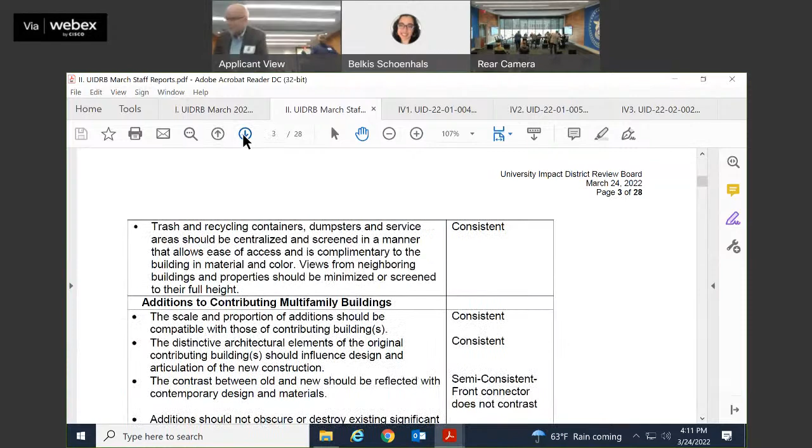March 6th. Go ahead. Yeah, so this is 1782 North High Street, which is a contributing commercial building built in 1909.

The applicant is seeking approval to modify the exterior of the building to accommodate a new Walgreens pharmacy. Exterior modifications include patch and repair of masonry, new paint where needed to match existing, a new metal enclosure, stairs and door on the east elevation, new exterior lighting, window security film on one ground floor storefront window, and new roof mechanicals.

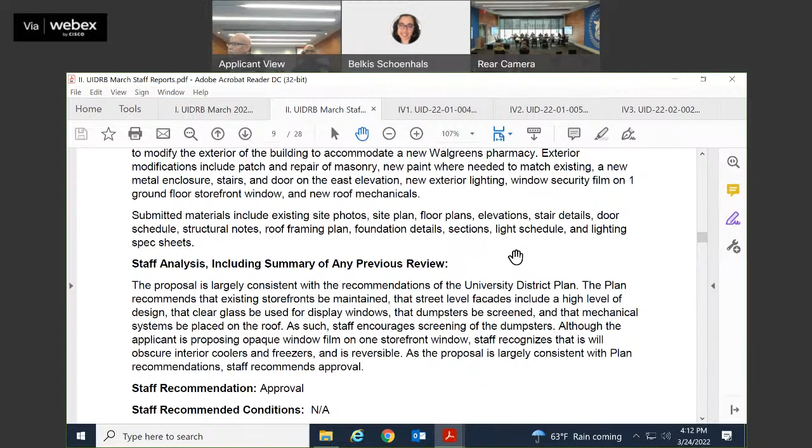Submitted materials include existing site photos, site plan, floor plans, elevation, stair details, door schedule, structural notes, roof framing plan, foundation details, sections, light schedule, and lighting spec sheets. I'll just quickly go to the application.

So this came before the board last month. And the primary concern with this one were the elevations, which had the window film screening. So I can scroll to those, as that's been the primary change.

We still have all the same drawings as were presented last month, but as you can see noted in red, this is the change where they just have the window film on this one window versus before it was on this window, all of these second story front windows, and this side window. So all of that has been taken off and they just have the same setup, just with the one window, with that window film.

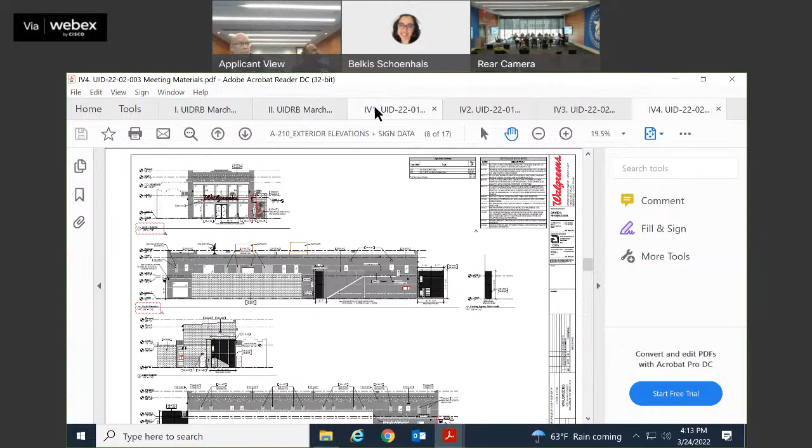And so after review, the proposal is largely consistent with the recommendations of the University District Plan. The plan recommends that existing storefronts be maintained, that street level facades include a high level of design, that clear glass be used for display windows, that dumpsters be screened, and that mechanical systems be placed on the roof.

As such, staff encourages screening of the dumpsters. And although the applicant is proposing opaque window film on one window, staff recognizes that it will obscure interior coolers and freezers and is reversible. So as the proposal is largely consistent with the recommendations, staff does recommend approval.

Thank you. Thank you. Would everyone who wishes to speak, please raise your right hand?

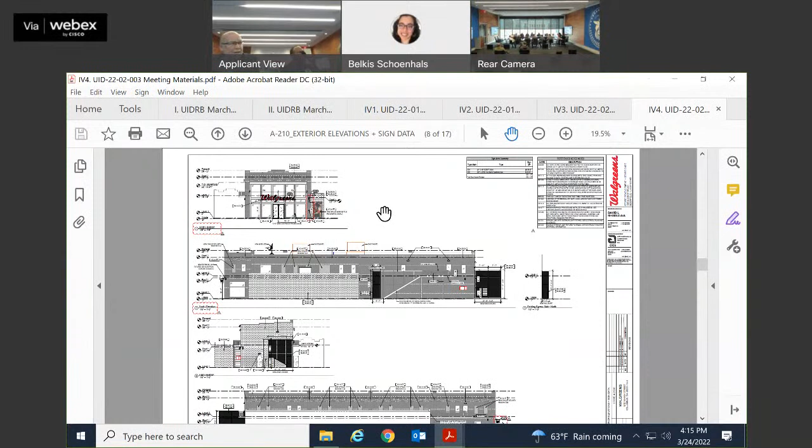No other comments? Can you roll down to the other lower elevation? This one, yeah, that's the Starbucks side. Okay, we don't have it from the other side. I believe this is the Starbucks side, that's here. And then the other lower elevation is here, so this is the street. Oh okay, yeah, so this was removed.

This is going to be clear now - this window would still be clear, so people walking up High Street would still see into the store. It's just the window on that little brick portion right there - that would be covered, which is where the freezers and cooler units would be. We decided that was really the least visible window of anything on that facade. That's kind of tucked back in the corner, it sits back pretty far.

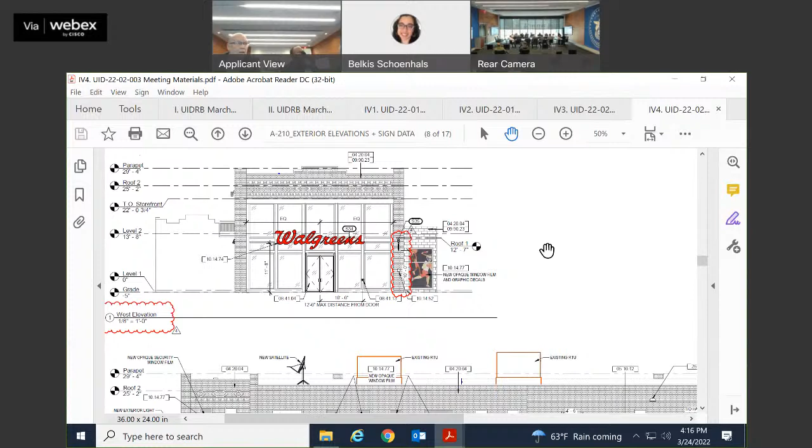We're trying to figure this out - so it's the west facing window in the room labeled passage 2, set down about 10 feet. There's some access into the back of the freezer, and the cooler is actually 10 feet back of the window. Right, but that's still kind of a storage area where there's some shelving, it's not a customer area.

So what's the film you're proposing - is it opaque, transparent, or translucent? It's a mural. We are sticking with a mural like we had presented last time, so I don't actually know if some light will come through it or not. I would say it's probably opaque, because it's just a mess back there - it's the back room area.

Well, you're printing something on it, it's going to say something. But what's the graphic? It's a mural, it's a mural that would have to get approved. Can you see it?

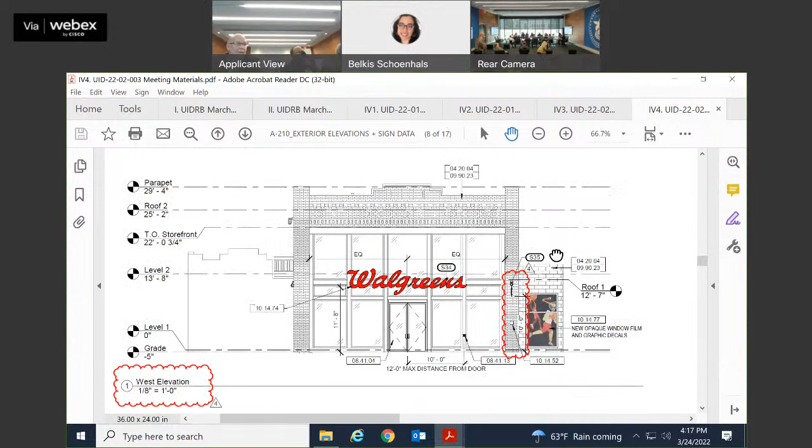Can we ask that you make it translucent? Well then you'd still be able to see the mess of the back room with the lights on behind it. No, that's not what translucent means - it just means you will see light through it, like it were a sign in a way. You will not see anything beyond illumination. If you think of a standard window film, they're often used to maintain privacy in offices - it's sort of milky white, you can't see through it, but it still lets light through.

I think basically we're trying to meet you halfway. We get that there's no good reason to see in there, and we're trying to maintain a certain amount of transparency, because the worst thing for a street is just opacity and darkness. It's not unreasonable, I think that we could probably accommodate that. And it's actually going to give you more presence, honestly, than if it were non-lit.

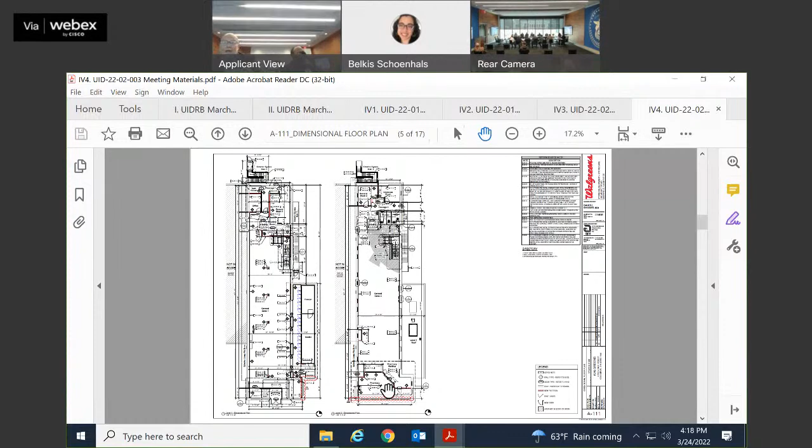Can you talk to us about your pharmacy and how you will control the west light? I know we complained last time that you were covering it up, and now I'm asking how you're going to deal with the sun. That's going to be a problem because we've tried to rework the pharmacy in the upper level of that store. The stairs are at the rear, so is the elevator, and for security purposes we like the pharmacy to look out on the whole length of the store. So the west side facing the sun is actually where the pharmacy would be.

Currently, and from what I understand, last time we had proposed some kind of window covering, but I think we could probably tint the glass. Would that work? I think if you had roller shades - we were talking roller shades, like these kind? Yeah, exactly. Last time you were putting an opaque film, correct?

And we've removed that and we've removed the wall that was immediately behind the window, so you will now see into the working guts of the pharmacy.

But to control the light, is that maybe an issue for the meds? Yeah, we're talking some sort of shade, more opaque than I would hope for, but they make all percentages of that. And we are facing due west, so that's going to be an issue, but that would probably be a good solution with roller shades.

Talk to us about your signage. That sign? That's on the next application, so we should have another one. Okay, so never mind, but we can jump right to that one when we're done voting on this one.

So how about we make a motion to approve the application with the following condition: that the west-facing recessed ground floor window graphic be translucent to allow light to be transmitted, but no view into the store. And that the second-story windows into the pharmacy be unobstructed with anything other than solar roll shades that will allow transparency in the evening, such that we will be able to see the pharmacy when it's dark out. And of course, all the shades have to be lowered at the same height.

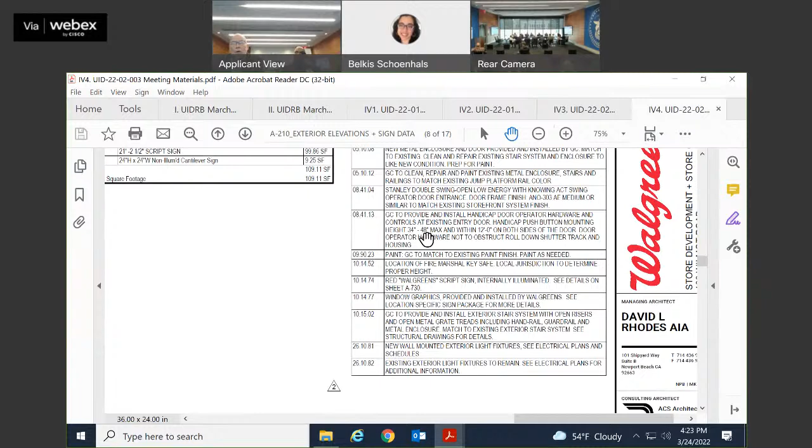It will not be painted red. We don't want to. I forget what our note on our drawing says, honestly. Glad you brought it up, Pasquale. We were so worried about the windows, we weren't thinking about that. So what, we have to answer that. We need to know what the answer is. I want to see what the note on our drawings said. It said we would touch up and repaint, retouch the paint and/or point. Paint to match, and I just don't know how you paint to match the rusty metal.

Okay, then I need to amend my motion. What do we want there, guys? You want it to stay the same? Sure, that's fine. I just wanted to know. Right now, do we have a sense of what it is? It's not Corten, is it? No, it's not Corten, it's some sort of distressed finish. It appears to be steel. Yeah, it is steel, it's structural steel, but it had something on it, it has patina.

All right, if we could amend it to add that the exposed structural steel on the facade finish will remain as is, other than maintenance.

Can I get a second to that amendment? Second. Sorry, who was that? Keone was the second. I'll call the roll then.

Mr. Fleming, yes. Mr. Grado, yes. Mr. Petrozelio, yes. Mr. Reeves, yes. Mr. Samansky, yes. Ms. Sauer, yes. Thank you. Okay, should we jump to the sign application?

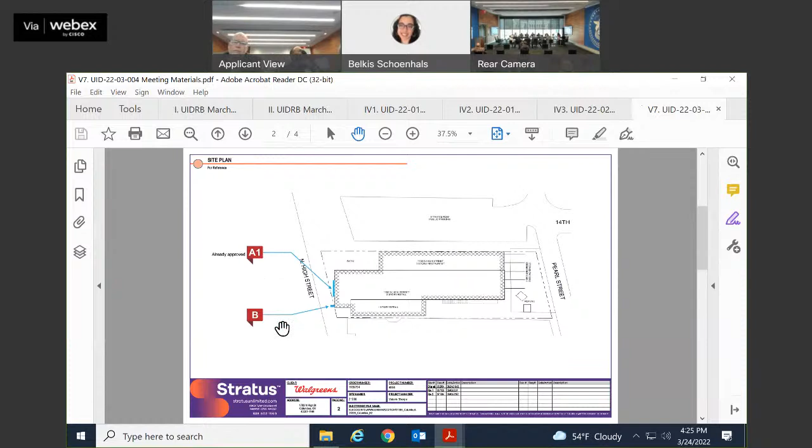This is the location of the sign. I wanted to note that sign A1 has already been approved and the CO has been issued for that, so we're focusing on sign B. This is the location, sign B here on the elevation, and you can see it there hanging in the rendering. This is the material details of the sign, so you can see the thickness, the size, and how it will look.

Based on that, the proposal is consistent with the recommendations in the University District Plan. The plan recommends projecting, pedestrian-oriented signs in the university area that are proportional to the building, located above the storefront display windows or transoms and below the second-story window sills. As the proposal is consistent with plan recommendations, staff does recommend approval.

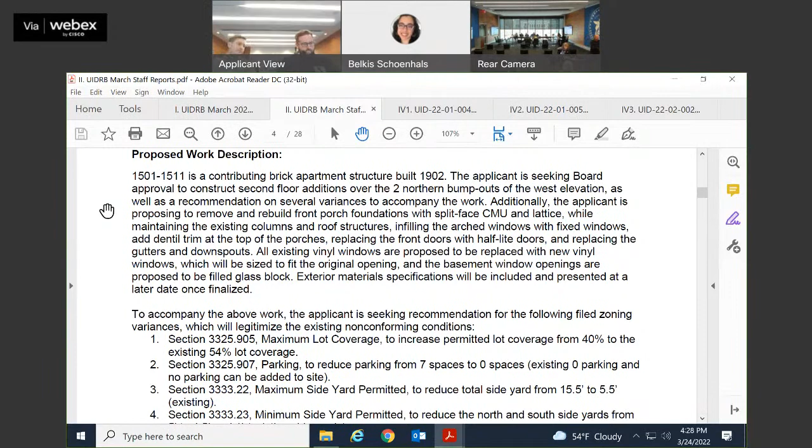1501 to 1511 — sorry, wait, I'm on the second. There we go. All right, so this is 1445 Neil Avenue, a contributing apartment structure which was originally two single-family homes built in 1908.

The applicant is seeking conceptual feedback to construct an addition to the existing building on the west elevation, as well as a recommendation on variances to accompany the work. The project will increase the number of dwelling units from 10 to 13, increase FAR to 0.91, reconfigure the parking area, and remove and rebuild the Neil Avenue entry.

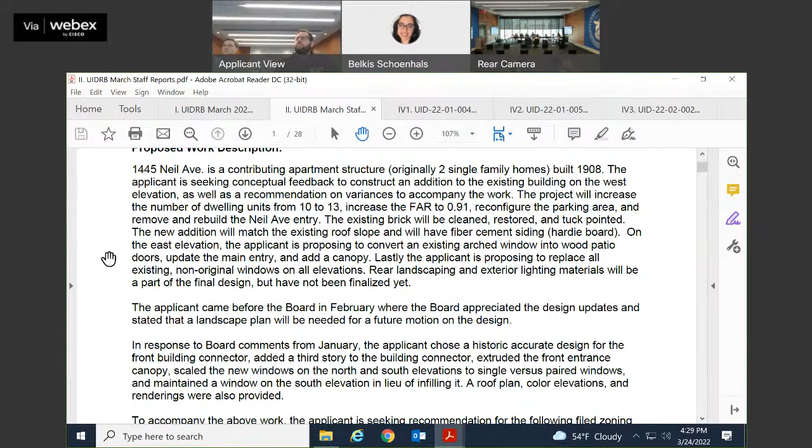The existing brick will be cleaned, restored, and tuck pointed. The new addition will match the existing roof slope and will have fiber cement siding, hardie board. On the east elevation, the applicant proposes converting an existing arched window into wood patio doors, updating the main entry, and adding a canopy. Lastly, the applicant proposes replacing all existing non-original windows on all elevations. Rear landscaping and exterior lighting materials will be part of the final design but have not been finalized yet.

The applicant came before the board in February, where the board appreciated the design updates and stated that a landscape plan will be needed for a future motion on the design. In response to board comments from January, when they originally came, the applicant chose a historically accurate design for the front building connector, added a third story to the building connector, extruded the front entrance canopy, scaled the new windows on the north and south elevations to single versus paired windows, and maintained a window on the south elevation in lieu of infilling it. A roof plan, color elevations, and renderings were also provided.

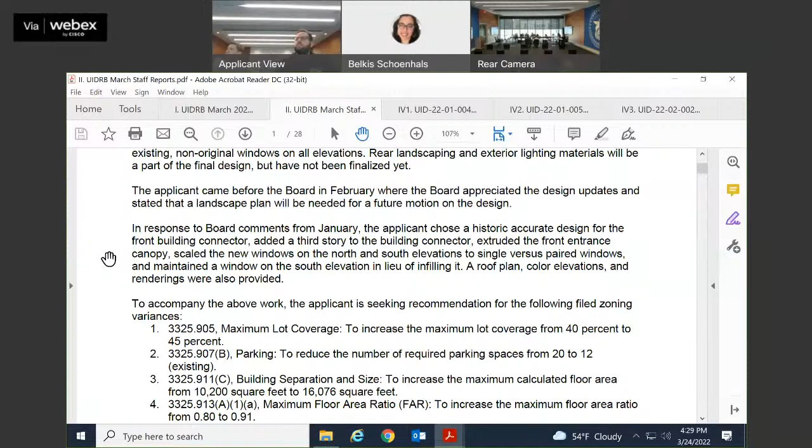For this work, the applicant is seeking recommendations for the following filed zoning variances: to increase lot coverage from 40% to 45%; to reduce the number of required parking spaces from 20 to 12; to increase the maximum calculated floor area from 10,200 square feet to 16,076 square feet; to increase the maximum FAR from 0.8 to 0.91; to reduce the total side yards from 16 feet to 11; and to reduce the minimum north side yard from 5 feet to 1 foot.

Oh sorry, there's two more. Not to provide two interior parking lot trees within and internal to the 12 space parking lot, and then to permit the existing driveway from Neil Avenue.

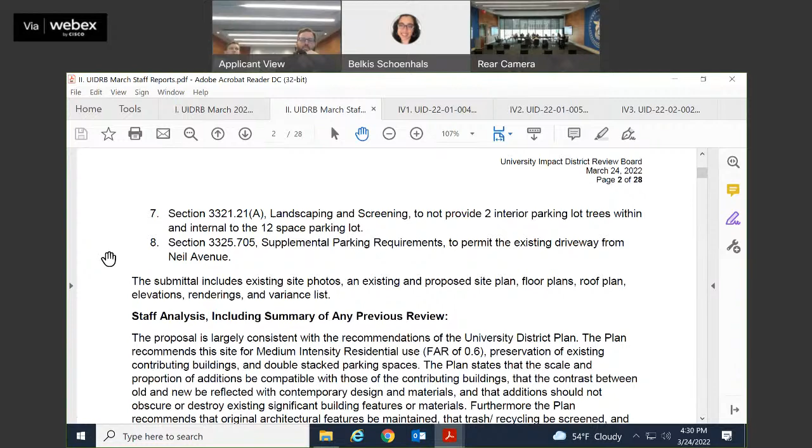Their submittal includes existing site photos, existing and proposed site plan, floor plans, roof plans, elevations, renderings, and a variance list. A lot of this is the same from last time, but I'll end on the elevations.

So that's the front elevation, that's the north elevation which is the side, the rear elevation, and then the other side. After review, the proposal is largely consistent with the recommendations of the plan.

The plan recommends a site for medium intensity residential use, which is an FAR of 0.6, preservation of existing contributing buildings, and double stacked parking spaces.

The plan states that the scale and proportion of additions be compatible with those of the contributing buildings, that the contrast between old and new be reflected with contemporary design and materials, and that additions should not obscure or destroy existing significant building features or materials.

Furthermore, the plan recommends that original architectural features be maintained, that trash recycling be screened, and that bicycle parking be provided. As the proposal generally preserves and/or enhances the contributing building and is compatible with its existing scale, staff is generally supportive.

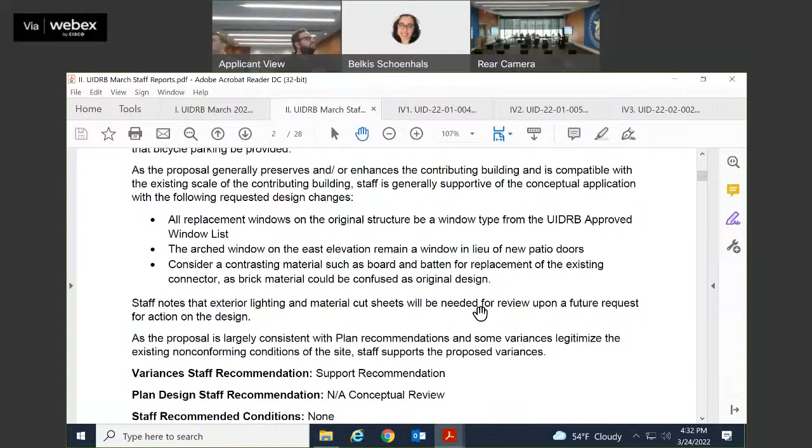We do request the following design changes: that all replacement windows on the original structure be a window type from the UIDRB approved window list, that the arch window on the east elevation remain a window in lieu of new patio doors, and then to consider a contrasting material such as board and batten for replacement of the existing connector, as brick material could be confused for original design.

Staff notes that exterior lighting and material cut sheets will be needed for review upon a future request for action on the design. But as the proposal is largely consistent with plan recommendations and some variances legitimize the existing non-conforming conditions of the site, staff does support the proposed variances.

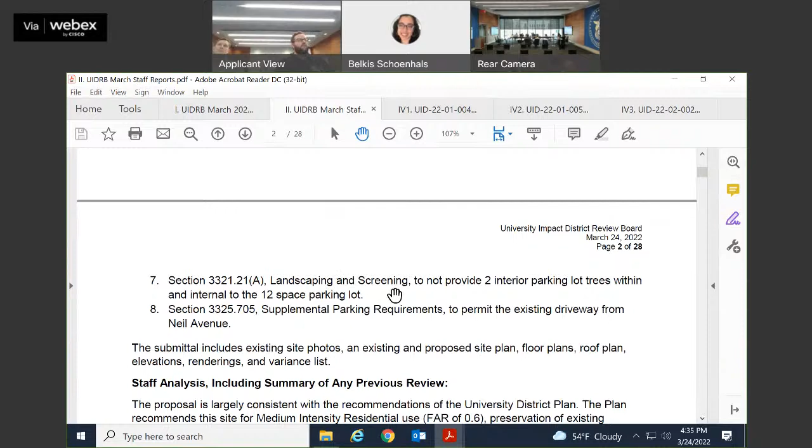We do have trees, but the variances - the parking lot requirements in the zoning code say the trees need to be internal to the lot. So we understand. What we're saying is we support you, we'll support you on the variance, but we want to see the trees elsewhere on the property. Right, so looking at your site plan, seems like you got room adjacent to the parking lot for trees.

Belkis, can you be clear about the density variances? They're showing a need for variances, but you're saying the plan supports a higher FAR, 0.6, 0.6. And existing is what, 0.4 or something? Let's see - they're increasing the FAR from 0.8 to 0.91.

So the way this exists already, it's over the recommended FAR of 0.6, and then they just want to increase that further by 0.11. So it's not a significant increase from what is currently built there right now. And you need to have it in order to make it all work? Yes, okay.

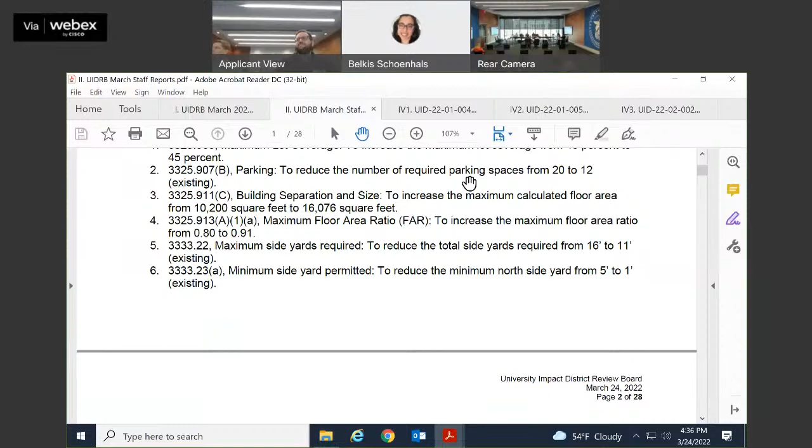And a lot of the variances are because the site is non-conforming as it's built right now, so a lot of the variances are to legitimize the non-conformance of this, to conform the site essentially. The 12 parking spaces that we're proposing match the number of parking spaces that currently exist on the site.

I think Frank and I are okay with it, and you are with trees, Ryan - anything? Okay, all right.

How does adding all of that building only add 0.1 to the FAR? Doesn't that seem - well, you're demoing, aren't you? Yeah, that's fair. There's some chunks on the back that they're getting covered. Now, isn't that new - the whole new... it does seem to be. It may have to do with the fact that there's more square footage when you go vertically on the original than there is with what they're adding.

So you did all the calculations and we can believe you, correct? Well, so I think just for clarity, we're allowed a 0.8 FAR. We're proposing 0.91. Right, because you're conserving the building, you get a bonus. I have no idea what the existing FAR is. Okay, so it's not how you characterized it.

Right, it's not. Well, that makes more sense. That's a good catch. Believe me. So 0.8 is allowed, okay, so we're only 0.1 above, not 0.3, so that makes sense. Okay, makes sense.

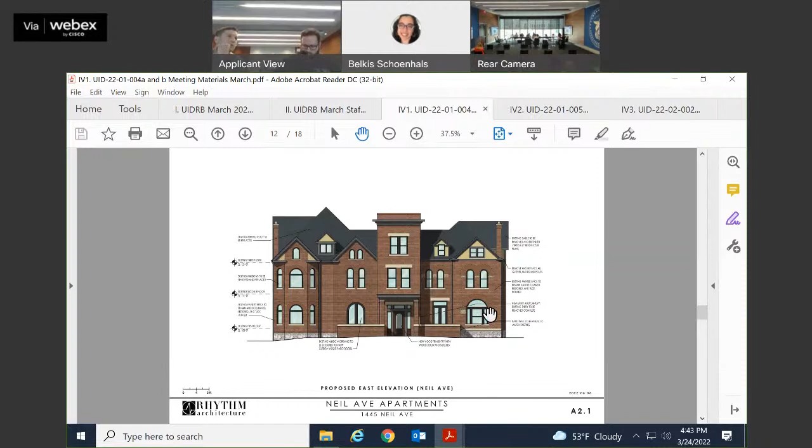Which one, all the way to the right? The right side, the first one. See, now you have weight, you'll notice on your patio doors, you have weight around the edges. And when you put a horizontal bar in there and leave the weight, it'll look fine. But on the right, it looks a little flimsy to me. So I don't know if that's an existing situation or a new window.

We're replacing all the windows, but that one's set in pretty elaborate trim. By replacing the windows, you just remove the glass, you're gonna keep the columns and the header. Okay, yeah, see, there's a lot more there. There's frame and then there's sash. Here, you're just showing frame. So we want to see frame and sash.

What was the other staff comment, Belkis? I think you had three. Window, let's go back. Oh, and see we're off the approved list. Or yeah, the windows you bring us to approve.

I mean, on the comment side, I remember this one, I guess two months ago, Brad, and I think it's clean, it works. The comments that were made the first time around about the differentiation between front and back, it all makes sense. I'm pretty good. So I think, do your drawings, come back with the stuff you need to do, and I think you're in good shape. Sounds good.

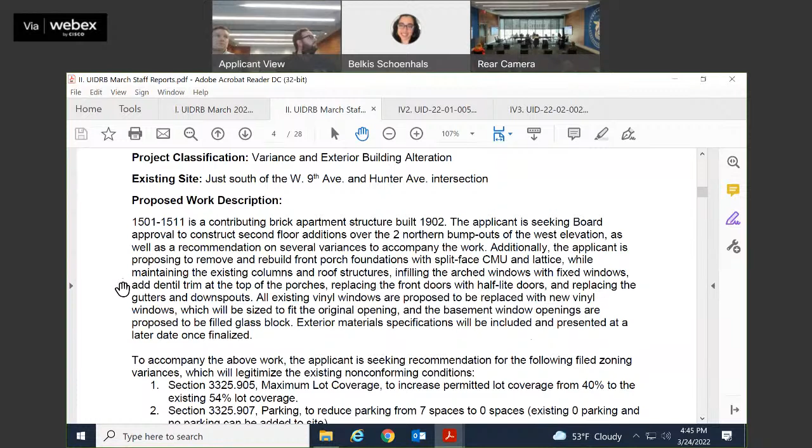The entire address, which is 1501 to 1511 Hunter Avenue, is a contributing brick apartment structure built in 1902. The applicant is seeking board approval to construct second floor additions over the two northern bump outs of the west elevation, as well as a recommendation on several variances to accompany the work.

Additionally, the applicant is proposing to remove and rebuild front porch foundations with split face CMU and lattice, while maintaining the existing columns and roof structures, infilling the arch windows with fixed windows, adding dentil trim at the top of the porches, replacing the front doors with half-light doors, and replacing the gutters and downspouts.

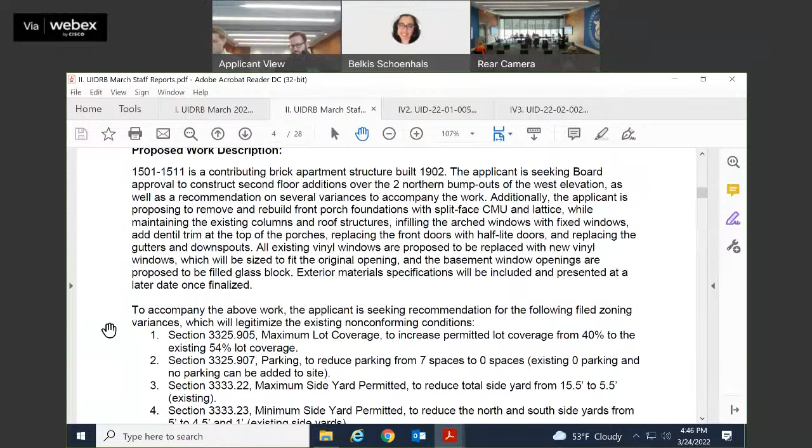All existing vinyl windows are proposed to be replaced with new vinyl windows, sized to fit the original opening. The basement window openings are proposed to be filled with glass block. Exterior material specifications will be included and presented at a later date when finalized, which actually is today.

To accompany the work, we have some variances: to increase the permitted lot coverage from 40% to 54%, to reduce the parking from 7 spaces to 0, to reduce the total side yard from 15.5 feet to 5.5 feet, to reduce the north and south side yards from 5 feet to 4.5 feet and 1 foot, and to reduce the total required minimum rear yard from 25% to 21%.

And again, a lot of these are to conform. Yeah, so Belkis, it appears that these are to bring it into conformance with the existing conditions.

Exactly. The applicant last came to the board last month, whereby the board recommended that the porch post piers be simplified and to use split face block for the front porch foundation. The board also recommended single pane or possibly double hung windows for the 3rd story dormers.

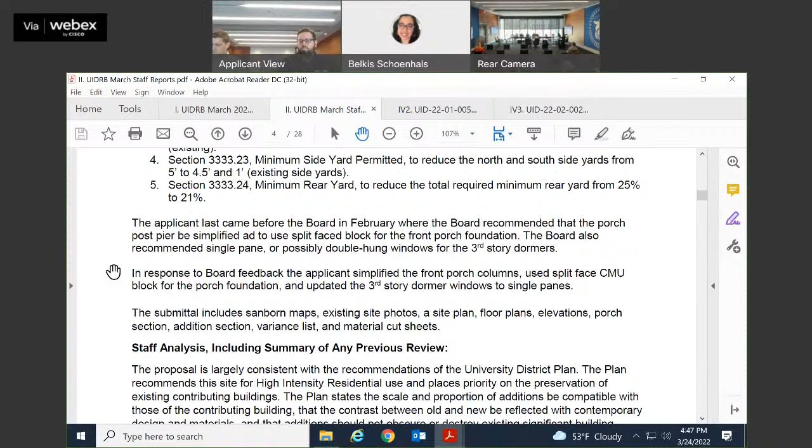In response to the board feedback, the applicant simplified the front porch columns, used split face CMU block for the porch foundation, and updated the 3rd story dormer windows to single panes.

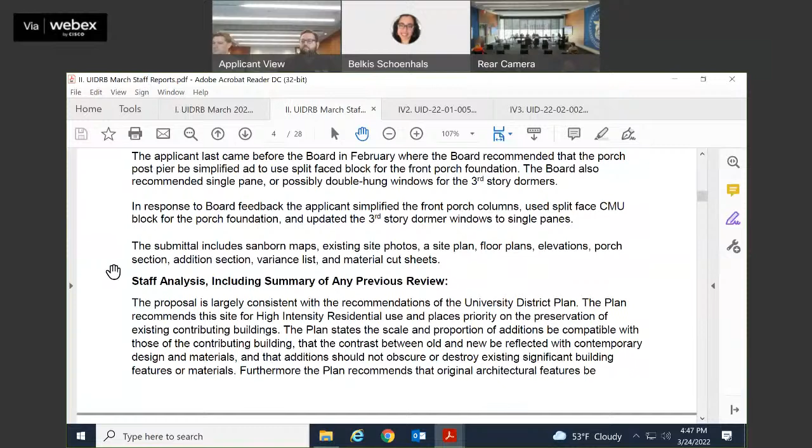The submittal includes Sanborn maps, existing site photos, a site plan, floor plans, elevations, porch section, addition section, variance list, and material cut sheets.

Again, most of us have seen these drawings, but going to the elevations, here you can see the difference in the windows up here in the dormers. The porch columns are fairly simple in design, and then really on this other side.

This is where we were talking about that split face CMU and how it met the grade. So they updated that and the materiality of that.

Based on this review, the proposal is largely consistent with the recommendations of the University District Plan. The plan recommends the site for high-intensity residential use and places priority on the preservation of existing contributing buildings. It states that the scale and proportion of additions be compatible with those of the contributing building, that the contrast between old and new be reflective of contemporary design and materials, and that additions should not obscure or destroy existing significant building features or materials.

Furthermore, the plan recommends that original architectural features be maintained, that windows and doors no longer used should be maintained and left in place, and that replacement doors and windows should fit the entire opening with no filler or additional framing. As the variances legitimize the existing non-conforming conditions of the site, staff recommends support of the proposed variance recommendation. As the proposal preserves the contributing building and the addition is in scale with the existing building, staff recommends approval for the design.

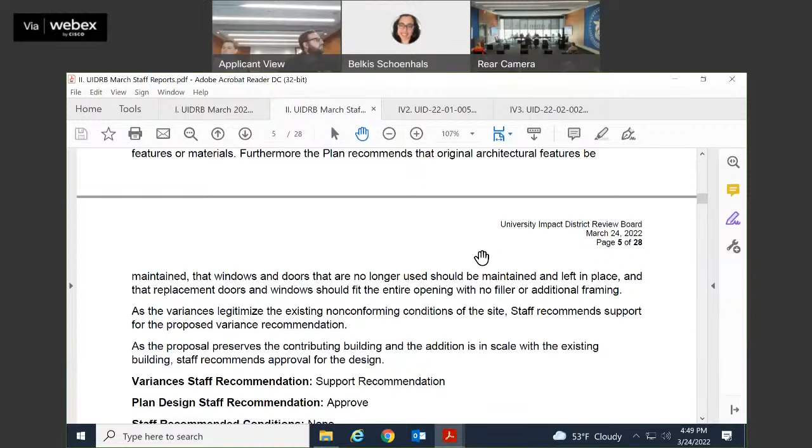Thank you. Thank you.

And are you here seeking approval today? Yes. Okay, and it looks like you've got the drawings. So it's two votes, variance and design, so it'll be two motions, one for the variances and then the second one will be for the design. Should we get the variances in total? I think we should.

I move to support the variances as stated. Second. Mr. Fleming? Yes. Mr. Petrozelio? Yes. Mr. Reeves? Yes. And Mr. Semansky? Yes. Thank you.

Tell us about the changes, Bradley, please. Sure. On the Hunter Avenue side, KV had a really good point about how the previous porch design didn't really meet the ground very well in all conditions.

So I went through and simplified the foundation to just be split face. I have bump outs below the columns that turn the corners and meet the grade at the alley side much better. And the windows on the faux dormers at the top were double hung last time and kind of squat, so we removed the center mullion and made them a single pane, fixed.

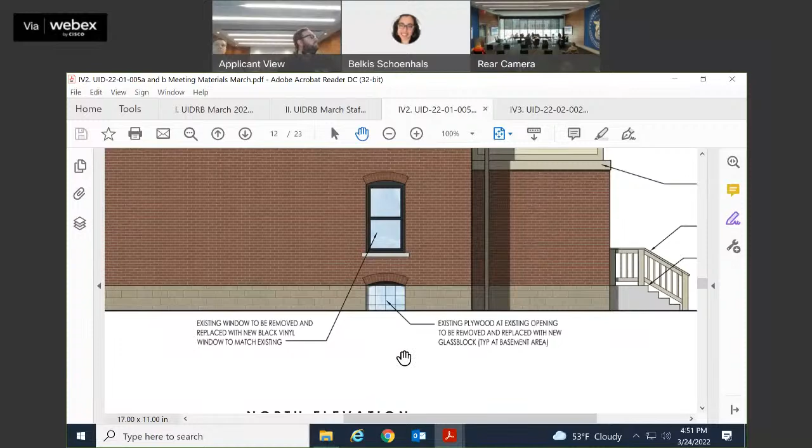We don't think we have to finish. I mean, it's fine.

Hey Ryan, make a motion. Submitted. Do I have a second? Seconded. Sorry, who was that? Kelly seconded. Okay, all right. Mr. Fleming, yes. Mr. Petrozelio, yes. Mr. Reeves, yes. Mr. Semansky. Okay, thank you, thanks guys.

Is that it? Are we done? Sorry, oh my God, can't get around this yet. Get you out the door.

One is on Summit, that's right. Okay, so 1520 Summit Street is a contributing brick, single-family home built in 1900. The applicant is seeking approval for exterior building updates and to construct a 3-story rear addition to convert the structure from a single-unit home into a duplex. The plans include new siding, roof, wood front door, aluminum-clad windows on the existing structure, which would replace vinyl windows and siding.

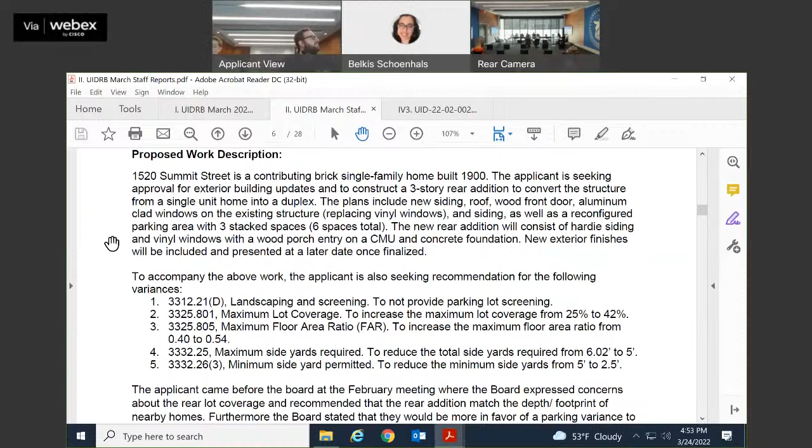As well as a reconfigured parking area with 3 stacked spaces for 6 spaces total. The new rear addition will consist of hardie siding and vinyl windows with a wood porch entry on a CMU and concrete foundation. New exterior finishes will be included and presented at a later date once finalized. So to accompany the above work, the applicant is also seeking a recommendation for the following variances, so we would need a motion and vote on this.

To not provide parking lot screening, to increase the maximum lot coverage from 25 to 42%, to increase the maximum FAR from 0.4 to 0.54, to reduce the total side yards from 6.02 feet to 5 feet, and to reduce the minimum side yards from 5 feet to 2.5 feet.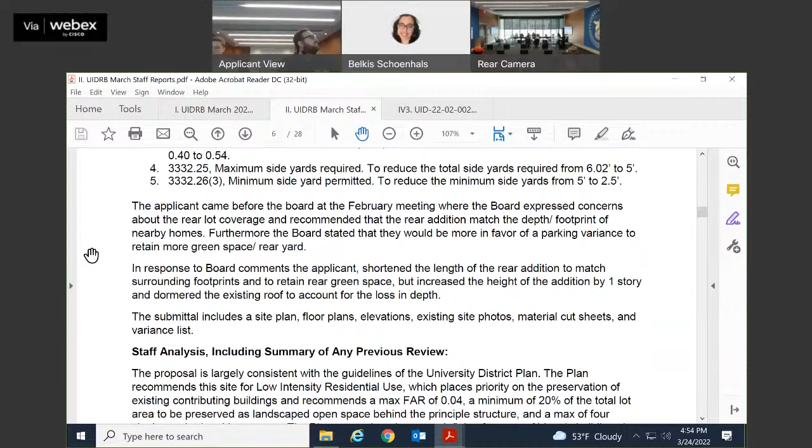The applicant came before the board at the February meeting where the board expressed concerns about the rear lot coverage and recommended that the rear addition match the depth and footprint of nearby homes. Furthermore, the board stated that they would be more in favor of a parking variance to retain more green space or rear yard. So in response to board comments, the applicant shortened the length of the rear addition to match surrounding footprints and to retain rear green space, but increased the height of the addition by 1 story and dormered the existing roof to account for the loss in depth.

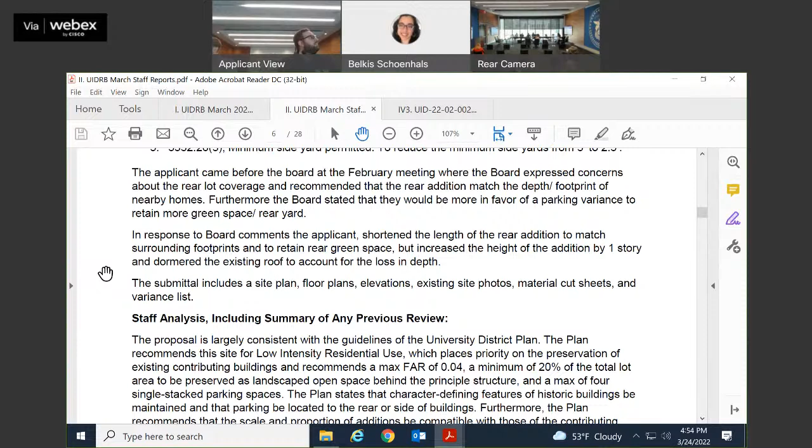So the submittal includes a site plan, floor plans, elevations, existing site photos, material cut sheets, and a variance list. To go through this one, this is the proposed site plan. This is the backyard. You see the parking here, rear yard, and then in this gray color is the addition. So this is shorter than what it used to be. And then we have the first floor plan, second floor plan, and then proposed attic plan.

So you can kind of see how they dormered out the sides there. This is the west elevation, facing front, so you can see those little dormers up there. The proposed south elevation, so you can see how the rear is shorter than what it once was. Proposed east elevation, so this is the rear, and then the proposed north elevation. Here we have a wall section, building section, another wall section here, and then this is what it looks like today, so that's the back, sides, and then this variance list.

And if you need, I can bring up the one from last month, I know it can be tricky to remember. But after review, the proposal is largely consistent with the guidelines of the University District Plan. The plan recommends this site for low intensity residential use, which places priority on the preservation of existing contributing buildings, and recommends a max FAR of 0.04, a minimum of 20% of the total lot area to be preserved as landscaped open space behind the principal structure, and a max of 4 single stack parking spaces. The plan states that character defining features of historic buildings be maintained and that parking be located to the rear or side of buildings.

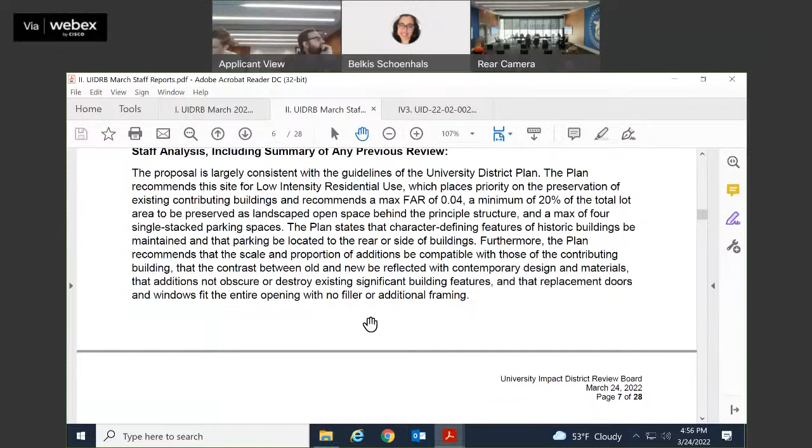Furthermore, the plan recommends that the scale and proportion of additions be compatible with those of the contributing building, that the contrast between old and new be reflected with contemporary design and materials, that additions not obscure or destroy existing significant building features, and that replacement doors and windows fit the entire opening with no filler or additional framing.

So as the proposal preserves a contributing building and the addition is in scale with the existing building, staff is generally supportive of the variance recommendation, but requests that 4 parking spaces be provided in lieu of 6 to ensure consistency with the plan. A recommended layout is to have 3 single stack spaces across with 1 double stack space to maximize the usable green space.

Staff is generally supportive of the conceptual design and requests the following design update: that all replacement windows be of the window type from the approved window list, for the contributing part of the structure. Overall, we support recommendation for the variances.

Thank you. Additional comments? As far as the variances are concerned, no further issues. Any comment among board members regarding the variances?

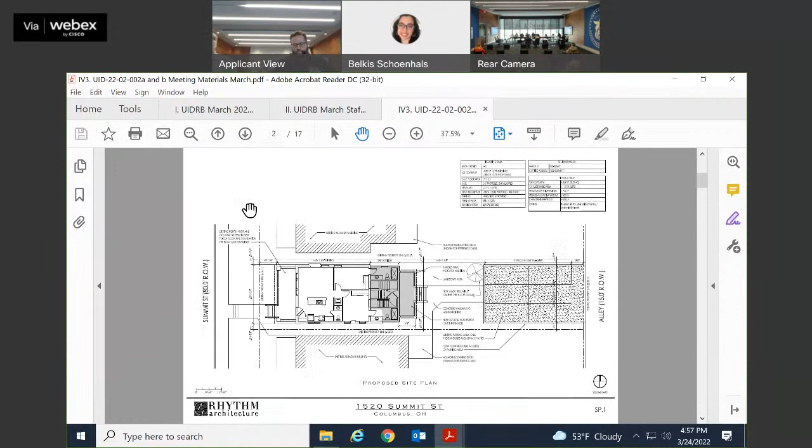Because you've essentially made it no deeper than your neighbor. Correct. But what about the bulk, though? I mean, those are enormous. To call them dormers is a bit of a semantic issue here.

Can we see the streetscape? Can we see the setback? Take me to the wrong house. Oh no, it's the other way. Yeah, Google Maps takes you to the wrong house. This one, it's the third house.

The adjacent buildings have pretty similar sized dormers that actually face Summit. Ours would be set back quite a ways. Those are smaller, but on the same side of the street there. Which one's the building? That one, that one. I would zoom out at 10.

Let's go down the street, please. Oh yeah, left or right? No, sideways, if you can. So letting me go over to the side. There you go, right there, stop, please.

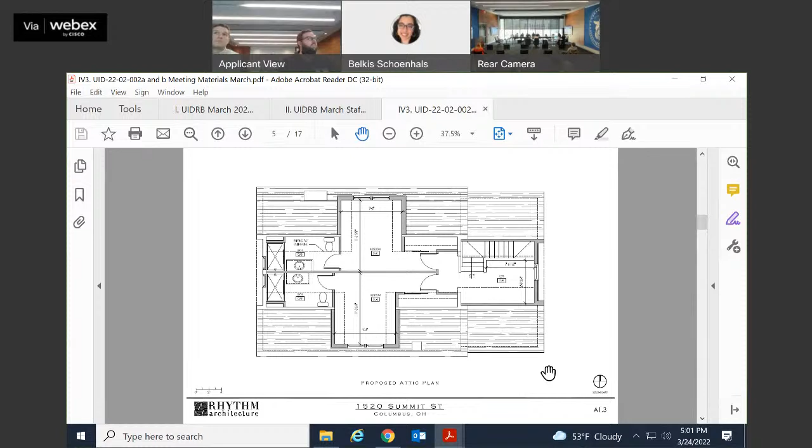I think the thing we're struggling with is if you look at the image of the street, the dormers on the adjacent buildings are fundamentally subservient to the primary roof line. It reads, they're a little different, they're hips, but they read as hips with dormers. What you're doing is, you're calling it a dormer, but you've basically now got like a cruciform gable rather than a dormer. So I think what Frank's at, which seems a reasonable compromise, is if you can drop the ridge of the dormer a little bit, the dormer is subservient to the gable, so it doesn't break the ridge. Gotcha.

Now, what about changing the pitch? I know that's heresy, but let's look at the side elevation again. Would it be the end of the world? What is that, 8 in 12? Does it match the other pitch? I mean, 9-12, you could put it.

9. What about a shed? You could put a shed dormer in, or you could lower the pitch. I don't think it would matter much. I'd rather have a shed in there anyway. If the shed is reasonable, that's much better. You gotta keep the spring of it off the ridge, go down a foot.

Please go back to the street view. Sorry to keep asking. I think I'd be okay with the shed. It would fall back better, wouldn't it? Yeah. I'm okay with that.

So why'd you propose the gable? You were second guessing us. That's not it. Thank you for saying it, so I didn't have to say that. Well, it's your job to second guess us, so I said that'd be embarrassing.

I think it's reasonable because fundamentally it's a nice house, right? It's a clean two-story gable with a nice clean form. I think what you really want to do is, it's fine to put a dormer on there to give more space and more rent, but you want to keep it secondary to the primary form. I think a shed dormer will do that. It'll get you more ceiling space, and honestly it's going to be cheaper, surely cheaper.

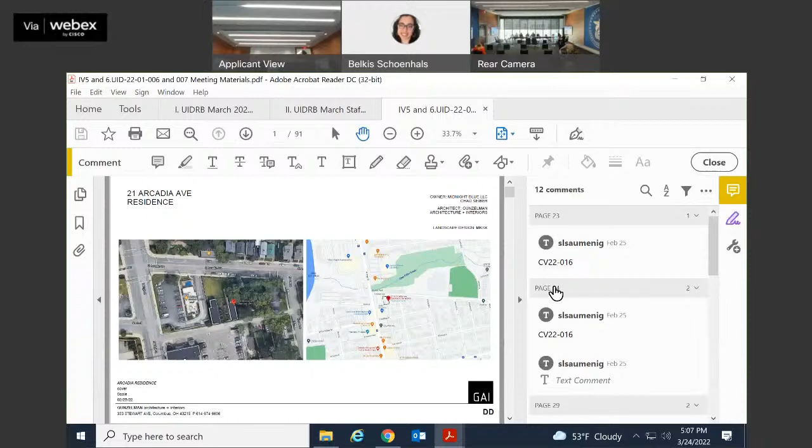$285 in 1965 for 2 Nakashima captain's chairs and 4 of those 3-legged chairs. That sounds about right. I think the tables back in the day went for a few thousand, and maybe they're now worth 60 to... Well, first I thought that's a huge amount, but then I realized that's how much my high school tuition was, the most expensive Catholic school I paid through a year. Catholic school tuition was $15,000 to $20,000, which is about how much those pieces are worth today. Now it's better, it's normal.

So it looks like we're on 21 East Arcadia. It's funny you say that. It was in the 800s. Well, you do it because it was the most. We're back on.

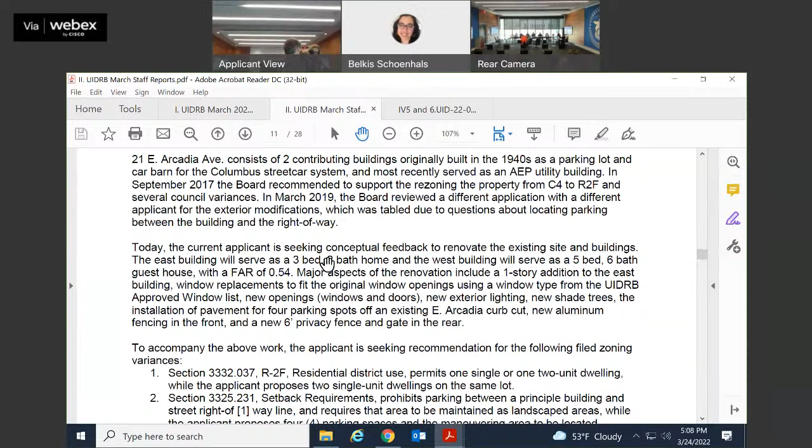21 East Arcadia Avenue consists of 2 contributing buildings, originally built in the 1940s as a parking lot and car barn for the Columbus streetcar system, and most recently served as an AEP utility building. In September 2017, the board recommended support for rezoning the property from C4 to R2F and several council variances. In March 2019, the board reviewed a different application with a different applicant for exterior modifications, which was eventually tabled due to questions about locating parking between the building and the right-of-way. Today, the current applicant, different from before, is seeking conceptual feedback to renovate the existing site and buildings.

The east building will serve as a 3-bed, 2-bath home, and the west building will serve as a 5-bed, 6-bath guest house with an FAR of 0.54.

Major aspects of the renovation include a 1-story addition to the east building, window replacements to fit the original window openings using a window type from the UIDRB approved window list, new openings for windows and doors, new exterior lighting, new shade trees, installation of pavement for 4 parking spots off of an existing East Arcadia curb cut, new aluminum fencing in the front, and a new 6 to 8-foot privacy fence in the rear.

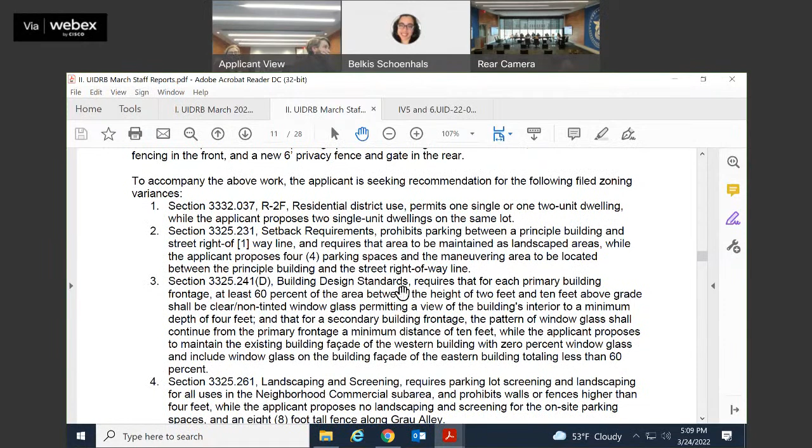To accompany the work, the applicant is seeking recommendations for the following filed zoning variances, which will need a motion today: to have 2 single-unit dwellings on the same lot, to have 4 parking spaces with the maneuvering area located between the principal building and the right-of-way, and to maintain the existing building facade of the western building with 0% window glass, including window glass on the building facade of the eastern building totaling less than 60%.

Additional variances include no landscaping and screening for the on-site parking spaces and an 8-foot tall fence along Grau Alley, 4 parking spaces in the new arrangement to be located between the principal building and the street right-of-way, maintaining a lot area of 10,000 square feet or 5,000 square feet per dwelling unit, and a reduced maximum side yard of 7.6% of the width, or 6 feet.

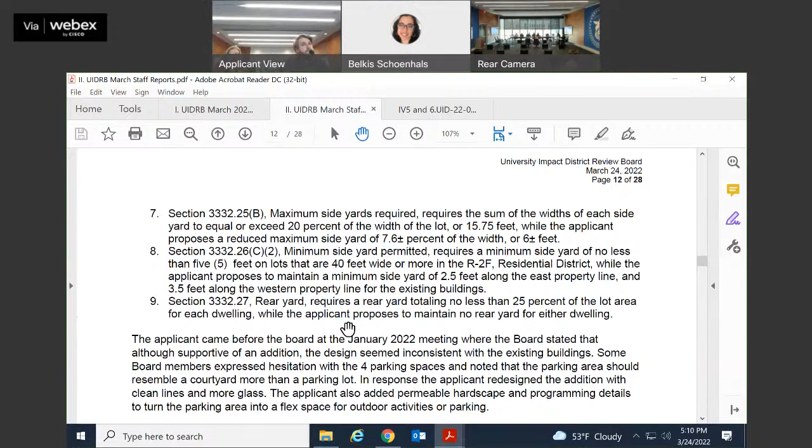Also maintaining a minimum side yard of 2.5 feet along the east property line and 3.5 feet along the western property line for the existing buildings, and maintaining no rear yard for either dwelling.

The applicant came before the board at the January 2022 meeting, where the board stated that although supportive of an addition, the design seemed inconsistent with the existing buildings. Some board members expressed hesitation with the 4 parking spaces and noted that the parking area should resemble a courtyard more than a parking lot.

In response, the applicant redesigned the addition with clean lines and more glass, and added permeable hardscape and programming details to turn the parking area into a flex space for outdoor activities or parking. The submittal includes existing site photos, site plan, elevations, renderings, variance list, and material selection.

Going to their drawings here, we have the site plan. You'll see the permeable pavers where the parking flex area would be, and you can see that the addition has changed to this envelope right here. Then we have existing site photos that we've seen before.

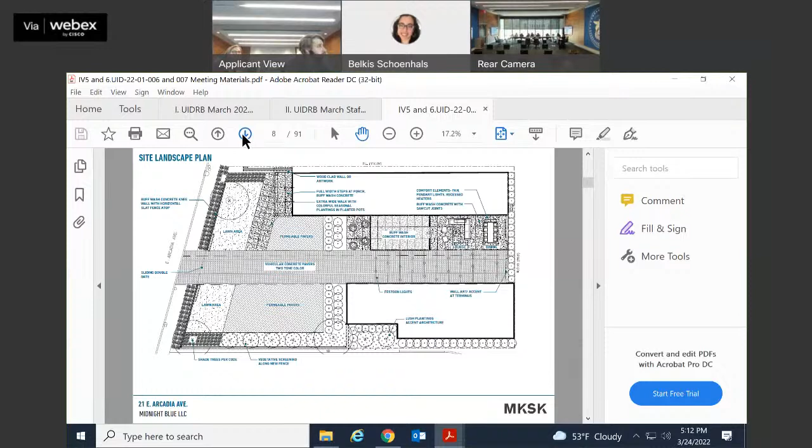Those are interior, so those are new. Here you have the hardscape, or I'm sorry, the landscape plan. You can see that screening has been included to hide the parking area. Here you have the hardscape plan, more landscape plan, design elements and materials, so these seem to be sort of inspiration photos.

And then you have the elevation. This is the new addition here, which is a little bit cleaner, more contemporary in design with more glass. You have the east elevation showing the new addition, the west elevation, and then you have the first floor plan, second floor plan, and the south elevation.

East elevation, this is for the secondary building, west elevation, and then the first floor plan, second floor plan, and here's some rendering. So that's the new addition there.

And then this is the view from the street, so you can see all of the landscaping and the fencing, the flex space. Another shot of that. And then the rest are just variances and all of their material selections. So we can go to those pages, as needed.

But after review, the proposal is largely consistent with the guidelines of the University District Plan. The plan recommends this site for neighborhood mixed use, which places priority on the preservation of existing contributing buildings and recommends multifamily uses, a max FAR of 0.5 and parking at a rate of 0.75 spaces per bed.

The plan states that the character defining features of historic buildings be maintained, that the primary facade of buildings address the street, that landscaping be provided in the front setback, parking be located to the rear or side of buildings, and that parking adjacent to the right-of-way be screened.

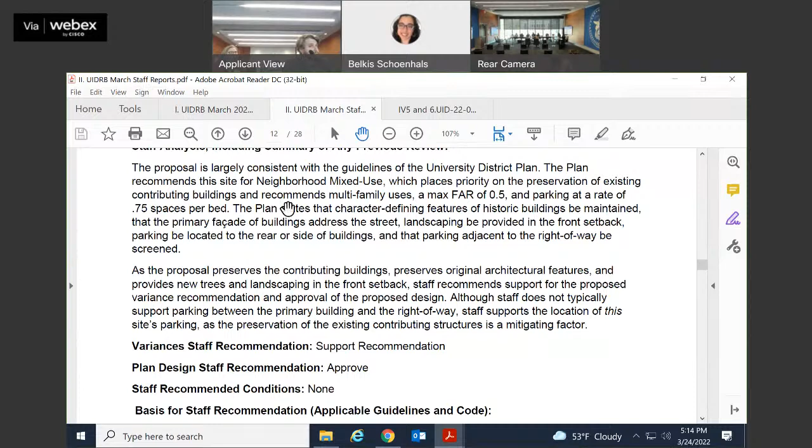My name is Kyle Green. I'm with Gunzelman Architecture and Interiors. I'm Rachel Harkle-Rhoda. I'm with MKSK.

I think it's probably beneficial to walk through some of the design changes in the landscape drawings that we produced. First, I wanted to touch on the variances quickly. The reason why we have 9 variances this time, and last time we talked about one, was by changing that

one variance, which was previously approved at 2 parking spaces in front of the building, and we're requesting 4. We're resubmitting a new site plan, and we basically have to go through all of the previously approved variances as well that were already approved in 2017. So a lot of them, 8 out of the 9 were already approved in 2017.

Just to be clear, now that we came back with a million variances. So yeah, the one variance for the 4 parking spaces in front of the building, I think we'll address that as we go through some of the design changes in the landscape plan.

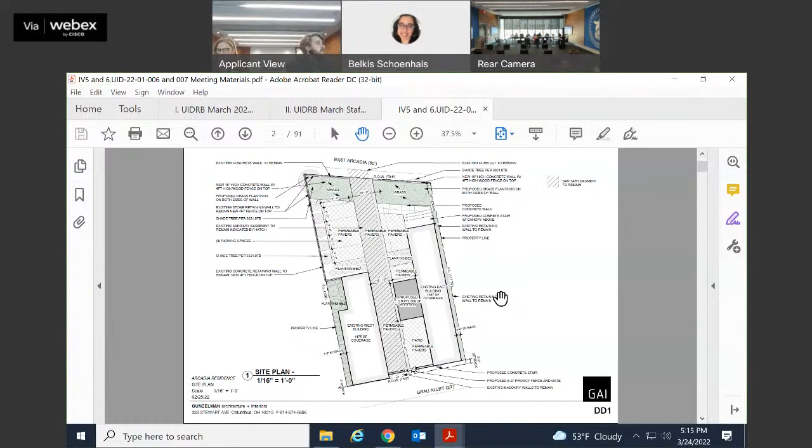Just to talk about the addition, we made a lot of changes to it based on the comments that we received in January from this commission, and we've reduced the footprint a little bit and pushed it back. We've obviously added a lot more floor-to-ceiling windows, and we've removed the entry to the building along this addition that we previously had.

We removed that and put the entry back to the existing entry of the original building. We've also changed the material of the addition, as well as the front canopy, to a black break metal panel. So it's more of an industrial feel.

Previously our old design had sort of a more vertical siding, and we agree with the commission's comments that we were trying to bring more horizontality into the addition. So we've added some cleaner lines and simpler horizontal trim.

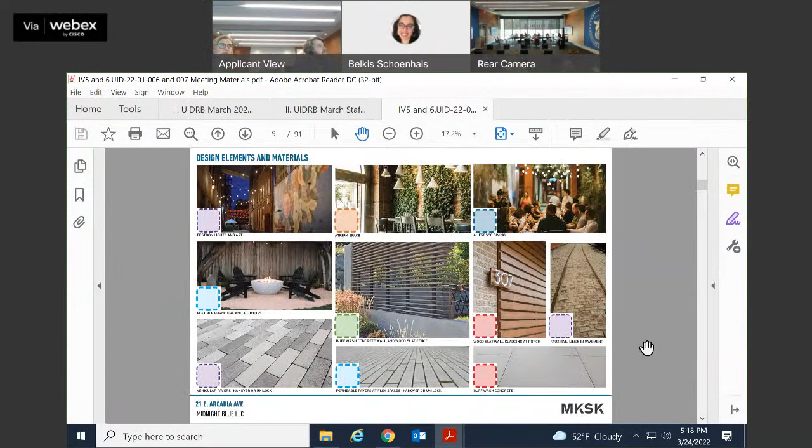I'll let you want to touch on some of the pavement or the pavers. Yeah, sure, screening. So both of the flexible spaces, we're looking at using a concrete paver that's a permeable paver for those areas. And up the alley, we call it the alley down the middle, that's also being proposed as permeable at this time. Two different types of permeable pavers, just for scale differentiation and defining those spaces.

And we do intend the two blue spaces, the blue north of the space, is that north, page north? Yeah, is actually more of a possible turnaround area too, so there's maneuverability within the space.

And then the intention is that the permeable areas are flexible, so they do have entertainment space, and the owner can have entertainment things like a movable fireplace or any of those things, so that everyone can kind of spill out to that space and not have to be restricted to the interior.

The entry walk is a buff wash concrete paving, and then that matches the buff wash at the rear dining lounge, which also spills into the atrium area. So that way we're kind of creating an indoor-outdoor kind of feel within that zone.

Just to the bottom, to the west of the project here is an alley and basically a parking lot, fast food restaurant. So we've provided screening along there as well, really creating zones of flexible use in the space, but when you're in the space, you're kind of screened from some of the alleys and the parking lots as well.

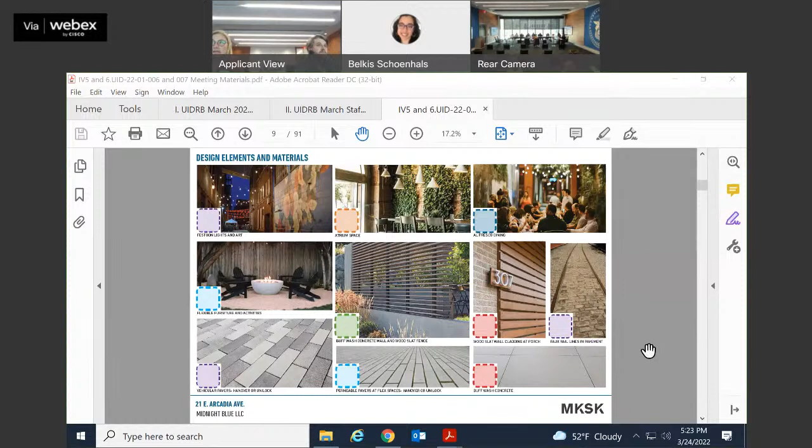Yeah, so this was a parking lot and a car barn. What does that mean, a car barn? So my question is, did they actually pull any cars up in here? It was the trolleys. Yeah, no, the trolley barn was in front of this building, it was in front of train car. This is an older building for the trolley barn, car barn.

I guess if you go back to your plan - the other observation is that once you get beyond the orange thresholds, going south, you have an exterior patio on the north side of the addition. For a party it makes sense, but it's just a lot of paving that doesn't really serve a purpose. I'm not suggesting it become a garden necessarily, but if you were in the addition, unless you put a bazillion pots out there, it became like a hardscape garden almost. This is their deal, so I'm not being critical, just saying that for entertaining it makes a lot of sense - you can have a hell of a party out there.

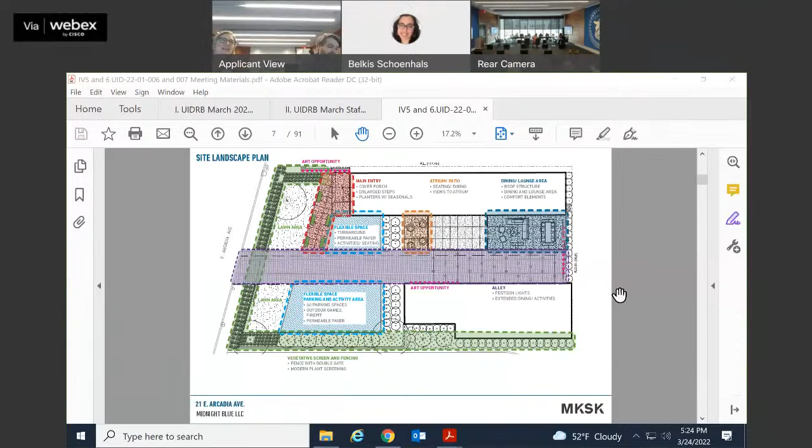We've talked about that area before, because it is a small space. We've discussed greening it up more, maybe making it an art piece in the future, but none of that has been really thought through. I don't know if they get enough sunlight today, but you might do something narrow like a espalier on the brick wall - something that gives it a bit more of a nod to an actual garden. I'm not saying you should do that, just pointing it out.

Other comments, questions? Belkis, could you show us the existing photographs? You tell me which one you like - just do a walk around for all of us.

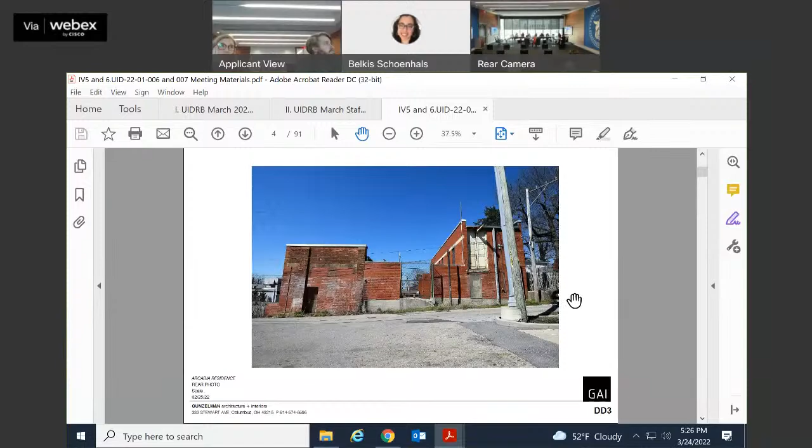So this is the front elevation, what you'd see looking off of Arcadia. This is the back - there's a CVS back here, off of Doddridge, so when you pull into the CVS parking lot, this is what you see. This is an alley that goes between the CVS leading out to High Street, and that alley continues back into a residential neighborhood. These are some interior shots of the building, this is in between the two buildings I think. And these are the old arches where they would pull the cars or trolleys in, along with more interior shots.

Are those glazed brick on the right, the yellow brick? Yeah, I think so, very high fired. I think that came later possibly, and that's sort of what's bricked in.

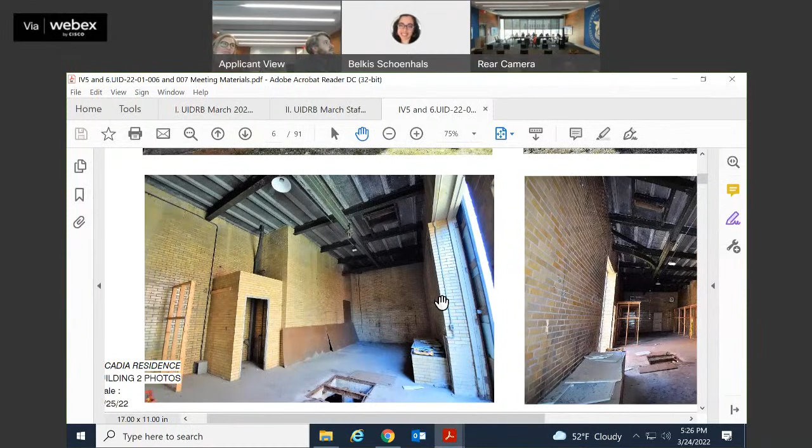Could you show us the relationship between the adjacent houses just east? I'll click on one - see the front street yard view here. So going up Arcadia, there's the house next door, and then there's this fence situation - a large retaining wall, a change in elevation, about 8 foot tall and covered in vine.

Once you show that - is there anything else you want to see, or okay, then can you zoom in on that straight-on front facade on the left? And then can you split screen it with their drawing of that facade?

You're a wonderful person. Hold on. Yeah, I know. Wow, perfect.

No, make it bigger, the one on the left, zoom in, yeah. Make it about the same size as the other one. You want just the- Yeah, you're good, you're good. Okay, you're good.

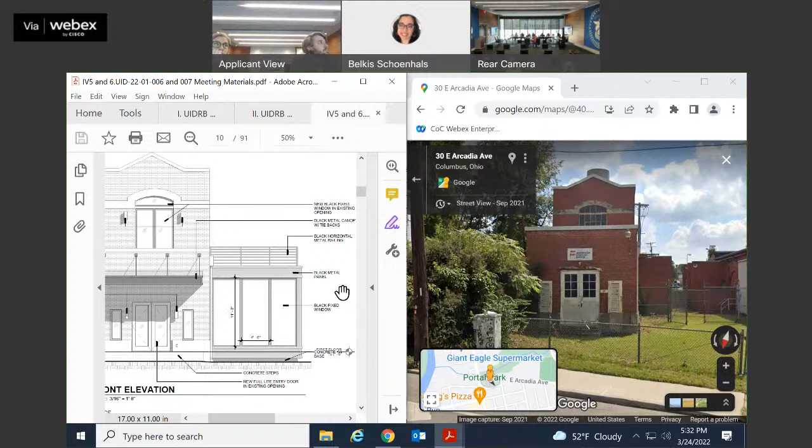And I just wonder if there isn't a better way of doing that. We've looked at like a cable rail that might lend a little delicate touch to the project, or possibly glass panels. I think the loss of the corner is the problem - because it sets back, and it's not... I don't know, it seems like there's an opportunity there to improve that. It's a fairly minor thing, but given that this is the one thing that gets added to the project, I think you're gonna see it.

Yeah, from my standpoint, I think the landscaping is pretty well done. I think you've effectively turned what could have been a pretty shitty parking lot into a more urban experience. I'm not convinced the rails are necessary in any way, but if you want to spend money on it, it's not my business. Which rails?

The rails that go down the alley. Yeah, those, I mean, good set. I can't promise it would happen - budget might not allow in the end.

And I guess one clarification - the drawing elevations show that the other building has storefront filling the existing openings, but the windows appear to be Pella units. Oh, yeah, sorry, we use the same Pella window for both. So yeah, they wouldn't be storefront.

Remind me, what are those again? The Pella windows, Impervia, fiberglass. Oh, fiberglass, what color? Black. Okay. Mine are very skinny. These are Pella windows? These big openings?

Yeah, and I was just talking to our window rep that we might need to put a stud in between them, so. But yeah, we talked about wrapping that, and around the perimeter too, I think - the frames are very, very stingy. They look just like holes in the wall, essentially. They don't, they're windows, they're holes.

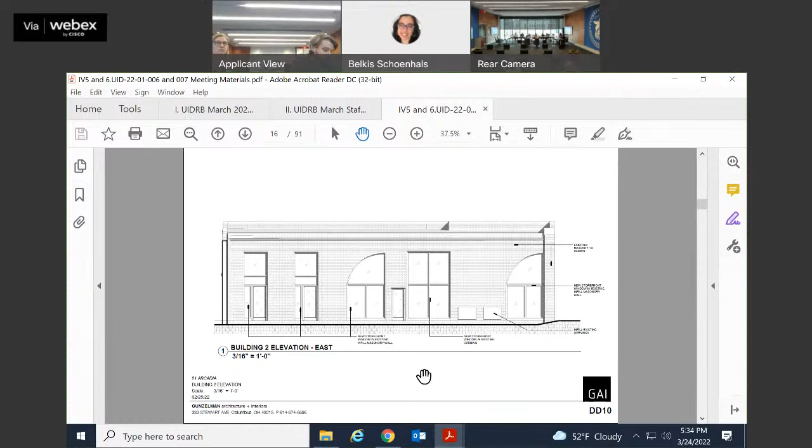Could you go back to the view from the alley looking east? Because if you don't do the fence, aren't the cars going to be visible? I think there's a different treatment on the west than there was. In the west, we're doing a ground cover with shrubs, understory, and then narrow trees.

So the fence isn't along the alley? The fence does go along the alley, and then it dies back, coming along the alley where the existing wall is. There's an existing knee wall along the wall, the drive-through of whatever this is, White Castle or something.

I'm referring to the rear. Maybe I misspoke. No, you want the west, you're concerned about the west. Yes, the west. Go to the front west, where the cars would be parked.

So there's a wall that's about 18 inches tall existing right now along the edge of our property to hold our property up essentially. Go a little bit west, Belkis. There you go, you can see what she's talking about, a little more down that drive aisle.

So that's existing, and it's not on our property. We don't touch it, but we have to put up our own fence inside that, on our property. But that fence is definitely going in? Yes, our fence. Okay, so that chain link's not yours. No, sadly. Isn't that terrible? That chain link and that knee wall are not ours.

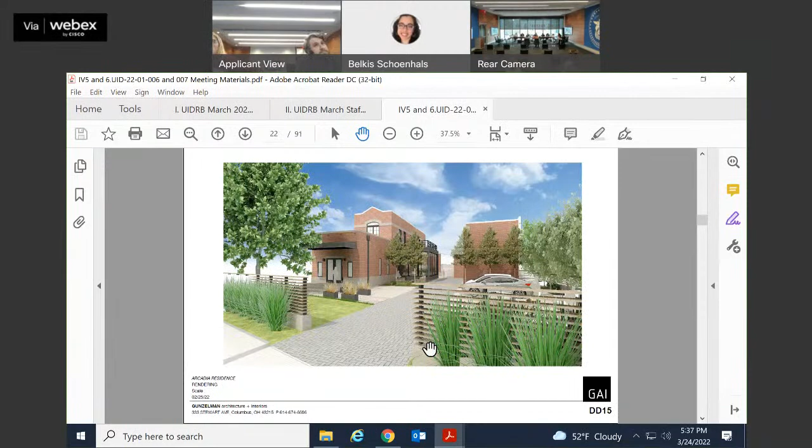Now, at some point, you need to for sure put those utility poles in your renderings. Oh my gosh, they're right in the middle of everything, middle of the sidewalk, and it adds to the aesthetic. Yeah, so we're trying to clean that up.

Okay, can we see the east elevation again, please? Proposed east elevation. Oh, the other building. Yes.

You're saying you can't get a standard casement window that'll fit the opening? Correct, and you need to have them operable, that wide. Yeah, I think these are a little wider than needed for egress, but this is as wide of a standard casement window that we can get.

What's the minimum width on emergency egress windows? The opening needs 5.7 square feet, and the opening, I think, is 24 by 20, 24 wide. What if you made the windows a little narrower, just narrow enough, and then had a fixed glass panel next to it? It would be off center, but I have a sense it would look better than that.

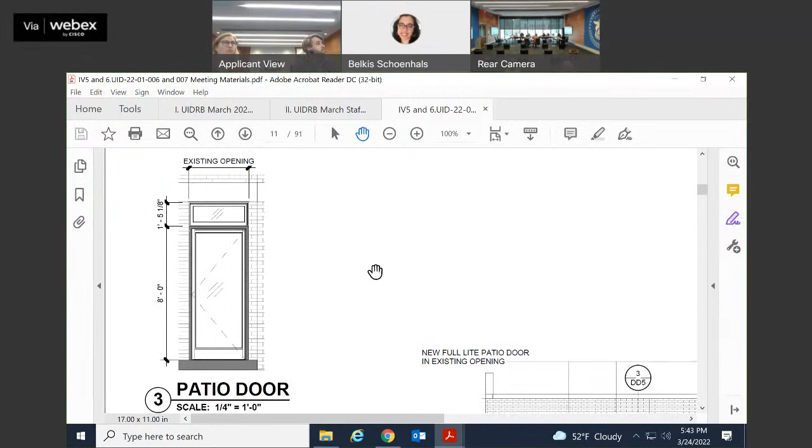So yeah, I missed the comment, but those are existing window openings, so we would enlarge it, put the door in there, and then take the masonry out from door to... which one is the new one, are they all existing openings?

Yes, yeah, and they're all different in width? I think one of them that's wider than the other, the second one from the right is wider. So you can find a door that's wide enough, but not a window that's wide enough. Yes, I think so, I think we could find a window, but not a casement window.

You might be able to go to a double hung, but I don't think we wanna do that. Might show up, because that way you'll be able to get... yeah, those openings are more vertical than you've drawn.

Maybe a double hung that's the right width - I can do it on this. I hate to ask you to go back to divided light, but you should be able to check on Google Maps, satellite. I don't think it needs to be divided lights, and I like casement windows. But the window really can be a window and be the right width. I understand what you're saying - it wants to be a double hung window.

I think we have a couple options here, and I think I hear what you're saying on the infill side. So just see what there is. The building does not have a ton of windows, so I think I would try to maximize the amount of glazing. It's okay, it's all right.

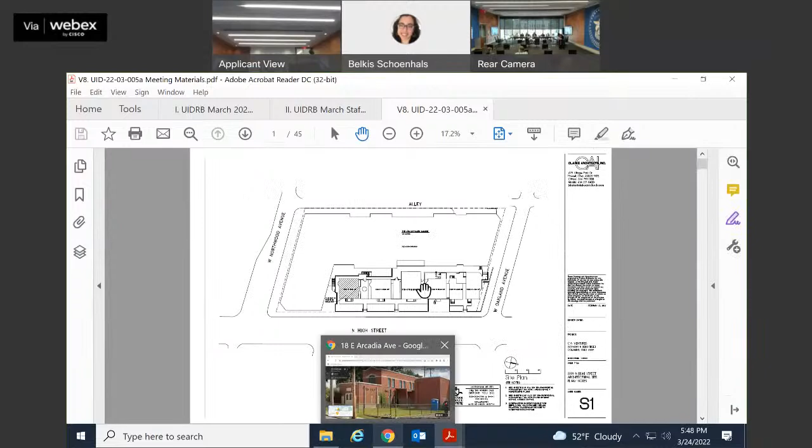Now we have the Pavey Square houses. The applicant's not here? All right, move on. James Clark. Yes. Oh, oh wonderful.

So we're not very... Did you skip one? The next one is 1782 North High, the little sign for Walgreens. But we did that one already, so the next one is 2259 North High, and I'll start the series of the three houses. I thought there was one before them, but 121. Yeah, we did that, yeah. Just opening up the materials here.

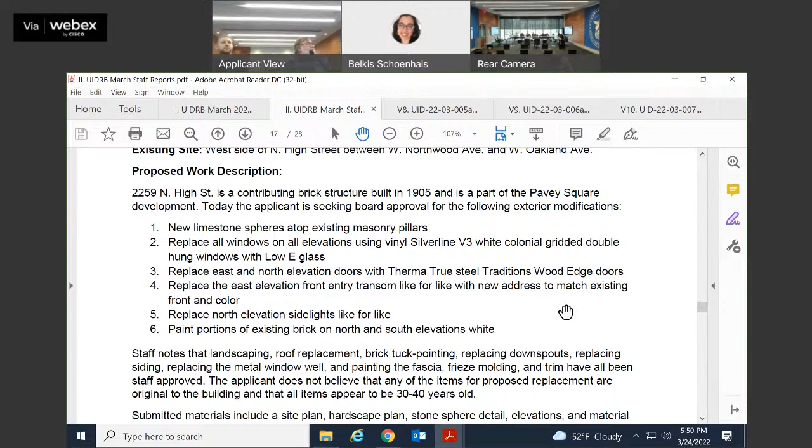So we are on 2259 North High Street, which is a contributing brick structure built in 1905 and is part of the Pavey Square development. Today, the applicant is seeking board approval for the following exterior modifications: new limestone spheres atop existing masonry pillars, replacing all the windows on all elevations using vinyl Silverline V3 white colonial gridded double hung windows with low E glass, replacing the east and north elevation doors with Therma-Tru steel Traditions wood edge doors, replacing the east elevation front entry transom like for like with a new address to match the existing front font and color, replacing the north elevation side lights like for like, and painting portions of the existing brick on the north and south elevation white. Staff notes that landscaping, roof replacement, brick tuck pointing, replacing downspouts, replacing siding, replacing the metal window well, and painting the fascia, frieze molding, and trim have all been staff approved already.

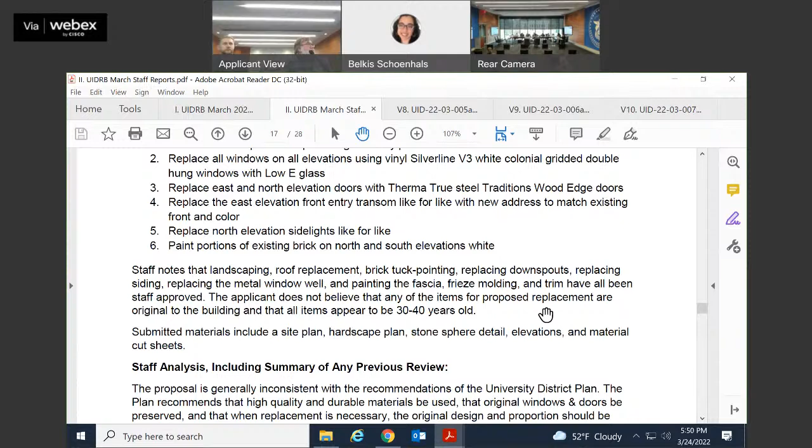The applicant does not believe that any of the items proposed for replacement are original to the building, and that all items appear to be 30 to 40 years old. Submitted materials include a site plan, hardscape plan, stone sphere detail, elevations, and material cut sheets.

So if you look to this one, this is the site plan. This is that first house after the new Pavey Square development on North High Street.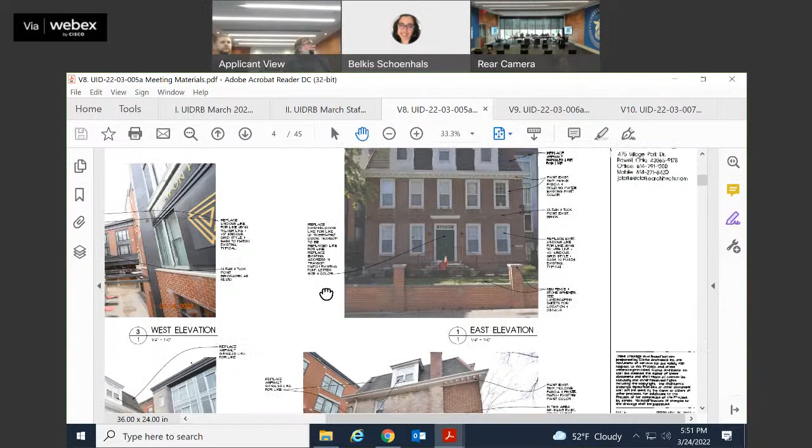So if you look at the front, they're proposing to replace this door and the transom above with an integrated door and transom unit. Another highlight is where it's sort of faded, they want to repaint all of this.

And then over here, they're proposing to replace the windows and replace the existing door and these side lights with one integrated unit. And then we have materials after that.

After review, the proposal is generally inconsistent with the recommendations of the University District Plan. The plan recommends that high quality and durable materials be used, that original windows and doors be preserved, and that when replacement is necessary, the original depth, design, and proportion should be maintained.

The plan also recommends that public, semi-public, and private spaces should be demarcated clearly through the use of landscape, walls, fences, gates, pavement treatment, signs, and other methods to denote boundaries or buffers.

After consultation with the historic preservation staff, staff notes that some transoms may be original, and that replacing original door and transom openings that are individual units with new integrated door transom units—eliminating the original wood mullion between the door and the transom—is not consistent with plan guidelines.

Staff also notes that vinyl window products for contributing structures is not recommended, and that painting brick is not recommended. As such, staff recommends approval with conditions.

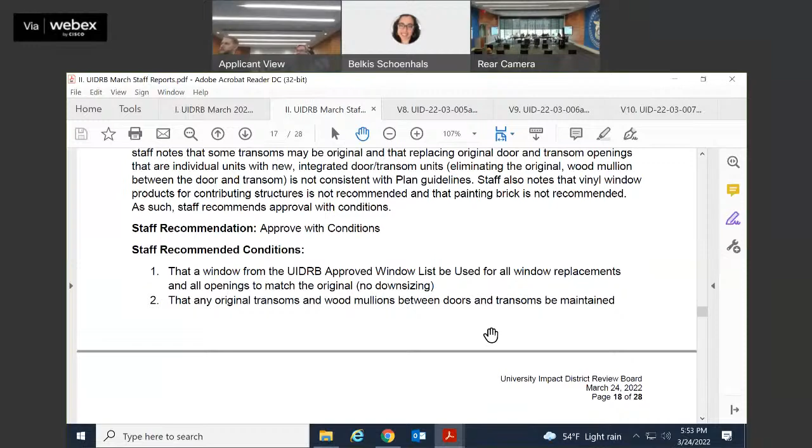The recommended conditions are that a window from the approved window list be used for all window replacements, and that all openings match the original. That any transoms and wood mullions between doors and transoms be maintained. To replace doors with the same design and profile of the existing doors, fully fitting the original opening.

And that no new paint be applied to the brick. And that if the test patch is successful, the existing paint be chemically removed, followed by cleaning and tuck pointing of the brick. Thank you.

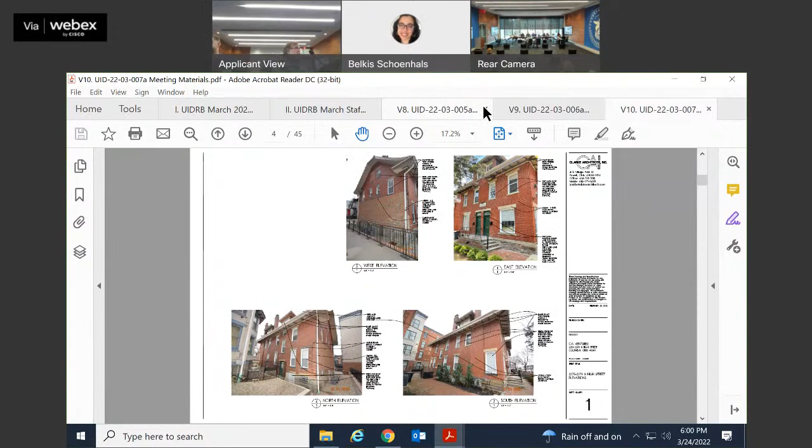Are they here? We're an hour ahead of our estimated time. Well, I'm willing to wait a little bit, but I will note the time is an estimate, and as an applicant myself, you come early - I would never come at the time that staff said to come. They're gonna learn a valuable lesson. As a matter of fact, the rule in my office is you are 20 minutes early to the beginning, no matter where you are. We recommend that applicants arrive at least a half hour before their scheduled time. So should we stay until 6:30? No.

No, the board can motion to continue the application to next month, and we still have to approve, move to put the staff approved applications into the record, and then there's an item for the staff approval list, so we can always circle back if they show up during that time. But let's move on because they really didn't do anything as far as I'm concerned. If they don't show up anyway, then it's fine by me. So do we want to move to... oh, I'm sorry, that one doesn't need a motion because it's conceptual, so we can just move forward in the agenda.

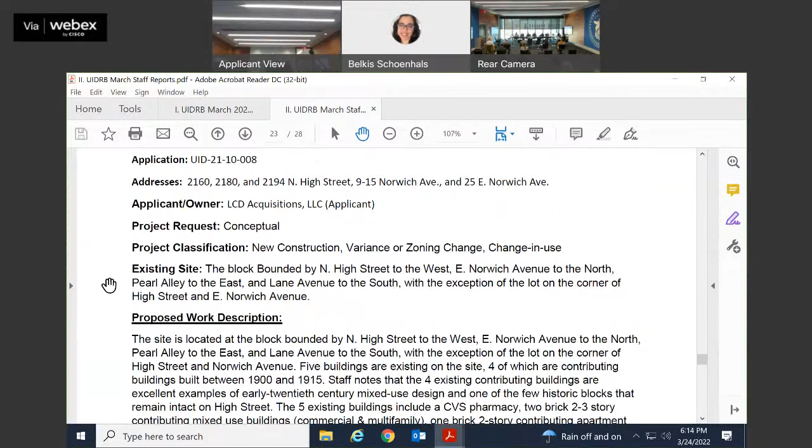Absolutely, yes. Okay, so this is a conceptual proposal for essentially what I'm calling 2180 North High Street, or Lane and High. This site is located at the block bounded by North High Street to the west, East Norwich Avenue to the north, Pearl Alley to the east, and Lane Avenue to the south, with the exception of the lot on the corner of High Street and Norwich Avenue.

Five buildings exist on the site, four of which are contributing buildings built between 1900 and 1915. Staff notes that the four existing contributing buildings are excellent examples of early 20th century mixed-use design and one of the few historic blocks that remain intact on High Street. The five existing buildings include a CVS pharmacy, two brick two- to three-story contributing mixed-use buildings, commercial multifamily, one brick two-story contributing apartment building, and one two-story contributing single-family home.

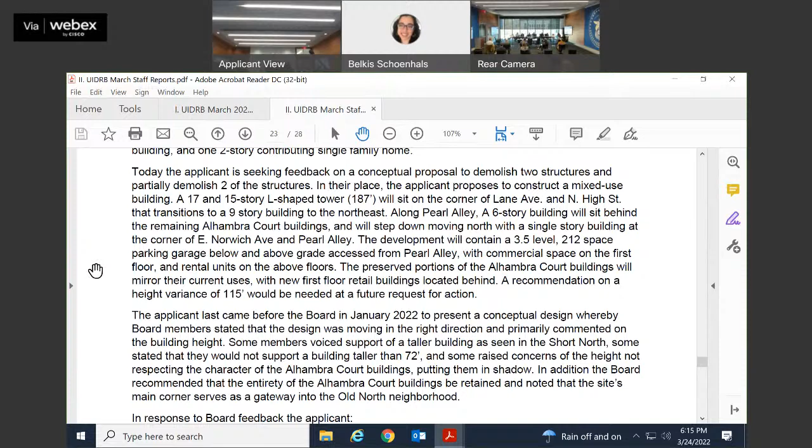Today, the applicant is seeking feedback on a conceptual proposal to demolish two structures and partially demolish two of the structures. In their place, the applicant proposes to construct a mixed-use building. A 17 and 15-story L-shaped tower will sit on the corner of Lane Avenue and North High Street that transitions to a 9-story building to the northeast. Along Pearl Alley, a 6-story building will sit behind the remaining Alhambra Court buildings and will step down, moving north with a single-story building at the corner of East Norwich Avenue and Pearl Alley. The development will contain a 3.5 level, 212 space parking garage below and above grade, accessed from Pearl Alley, with commercial space on the first floor and rental units on the floors above.

The preserved portions of the Alhambra Court buildings will mirror their current uses, with new first floor retail located behind them, and a recommendation on a height variance of 115 feet would be needed at a future request for action.

The applicant last came before the board in January 2022 to present a conceptual design, whereby board members stated that the design is moving in the right direction and primarily commented on the building height. Some members voiced support of a taller building as seen in the Short North. Some stated they would not support a building taller than 72 feet, and some raised concerns about the height not respecting the character of the Alhambra Court buildings, putting them in shadow. In addition, the board recommended that the entirety of the Alhambra Court buildings be retained and noted that the site's main corner serves as a gateway into the Old North neighborhood.

In response to the board feedback, the applicant maintained half of the Alhambra Court buildings along North High Street, updated the design to retain the contributing brick apartment building along East Norwich Avenue, included a partial step down from the southern tower to the Alhambra Court buildings, and maintained open courtyard space between the two Alhambra Court buildings. The submitted conceptual materials include a site plan, floor plans, program diagrams, and renderings. We can take a look at those.

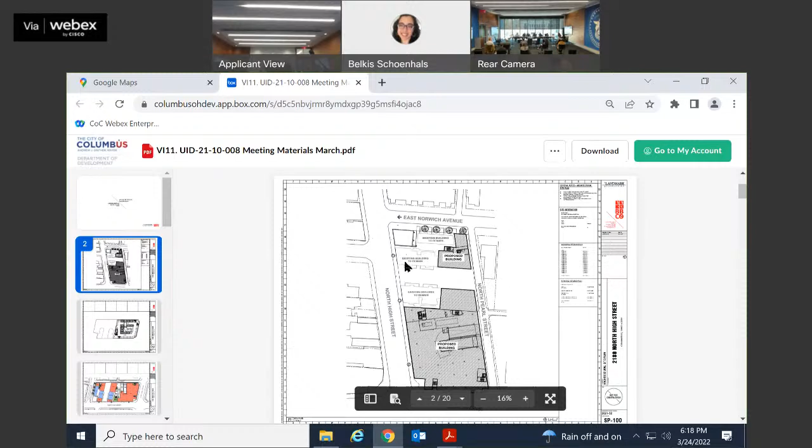So here are their materials on the slides. So here we have the site. You'll see here that the existing two-story apartments remain, which is something different from the previous proposal. And then here we still have half of the Alhambra Court buildings and the courtyard.

The plan's design guidelines recommend the preservation and rehabilitation of existing buildings which contribute to the district's diverse character, that new construction preserve and enhance unique characteristics of the district, that High Street and Lane Avenue continue as mixed-use corridors with the densest development, and that the design of new construction be compatible with nearby contributing buildings and surrounding streetscape.

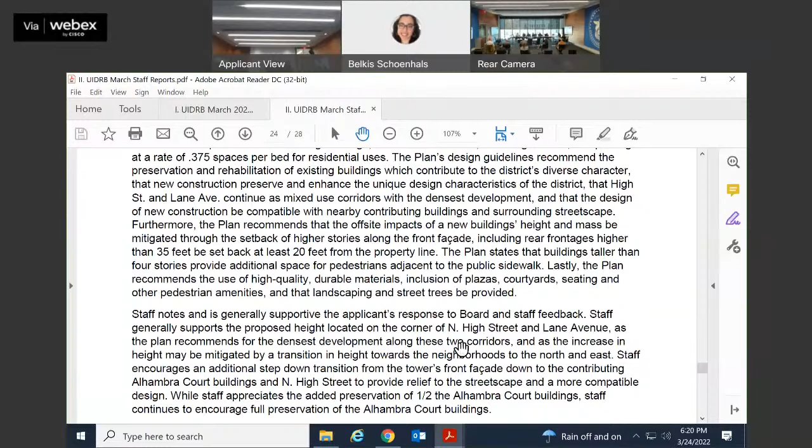Lastly, the plan recommends the use of high-quality, durable materials, inclusion of plazas, courtyards, seating, and other pedestrian amenities, and that landscaping and street trees be provided.

Staff notes and is generally supportive of the applicant's response to the board and staff feedback. Staff generally supports the proposed height located at the corner of North High Street and Lane Avenue, as the plan recommends for the densest development along these two corridors, and as the increase in height may be mitigated by a transition in height towards the neighborhoods to the north and east.

Staff encourages an additional step-down transition from the tower's front facade down to the contributing Alhambra Court buildings and North High Street to provide relief to the streetscape and a more compatible design.

While staff appreciates the added preservation of half the Alhambra Court buildings, staff continues to encourage full preservation of the buildings. And while staff is supportive of the height proposed, the ground level elevations and pedestrian experience will be important to the success of the project design.

As such, staff recommends tall, transparent ground floor elevations, wide sidewalks, landscaping, and pedestrian amenities along both North High Street, Lane Avenue, and on East Norwich as appropriate. The building materials transition to the residential neighborhood to the north and east. Landscaping, street trees, and pedestrian amenities on the site will be considered and reviewed for consistency with plan recommendations as the project progresses. Thank you.

Thank you. Excuse me for a second. Is there a list of the variances?

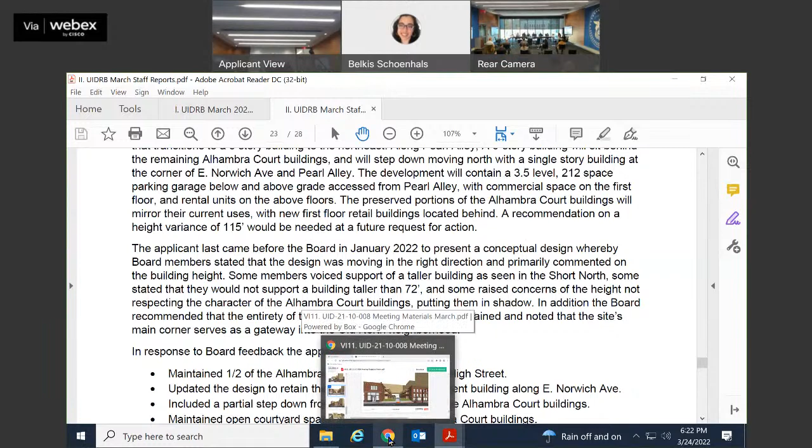Do we have the applicant here? Yes, here we are.

Oh, and I believe we have a speaker on this one. Is Susan still here? Yes, she is. Okay, I think she wanted to speak after the presentation. I think it makes sense to have the applicant present the design as it stands now, and then have the public speak in response. Okay, yeah.

I forget by the end, so I just want to. So those that would like to speak, raise your right hand, please. Do you swear or affirm to tell the truth, the whole truth, and nothing but the truth? I do. Thank you.

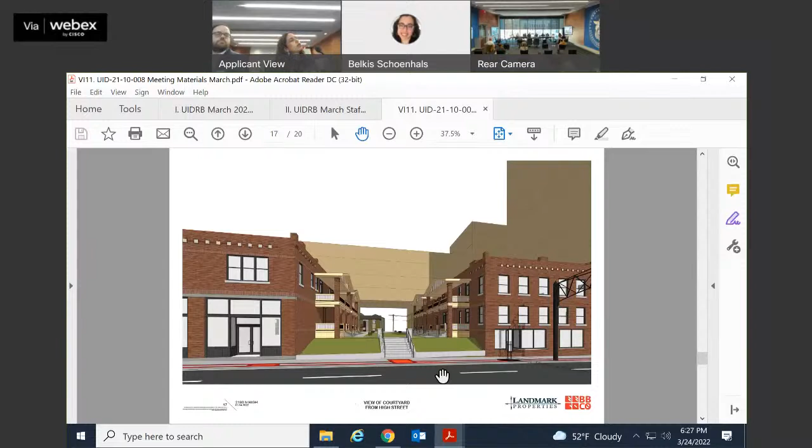For the green space, we had a plaza-type design last time, and we heard from you that it needed to be a little calmer. So we're going back to keeping it more similar to what it is currently, maintaining that entire streetscape very similar to what it is. Currently that green space goes from High Street to Pearl, and we're maintaining that in our new scheme, so the green space does continue. As it gets towards Pearl, that's where we're introducing new retail.

That space, we potentially are looking at maybe doing a little bit of a plaza design because it will be under the building, so green won't really work there. We're kind of transitioning the green space into more of a plaza underneath the building that spans across the green space.

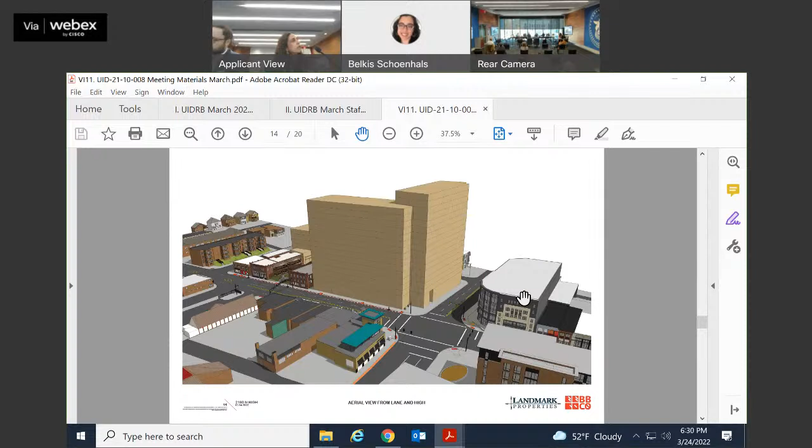So those are the interventions we've made with our previous design. We've responded to the stepping down towards Norwich, we've responded to the density being on the corner, and we played with the facade so that the shadowing is reduced somewhat.

We do understand that corner house is still a contributing building, part of the buildings that are considered contributing. So we have completed a HABS report on that building, I believe, and we can provide that to the board as well.

I think we've made really good progress in keeping quite a bit of the current fabric that's important along High Street, and Norwich has been our goal. With that, I will hand it over to Randy to speak a little bit more on that aspect.

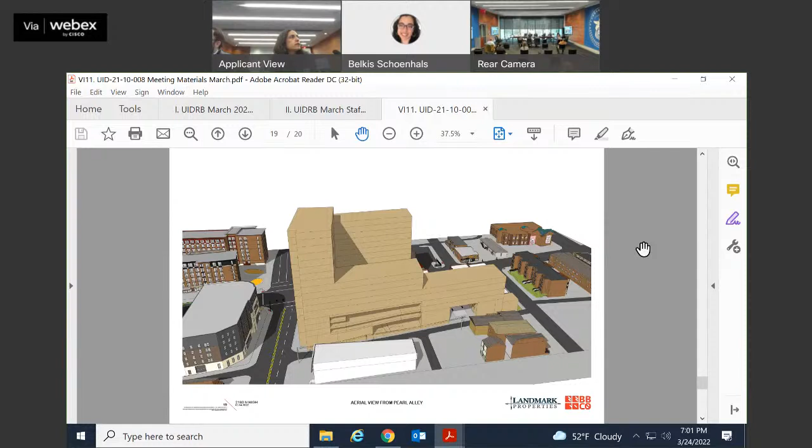Any other board comments? Well, in terms of the agenda, that was the last item, so unless the applicant has any other questions for the board, I think we can adjourn the meeting.

You guys feel okay, or clear on what the plans were? Do you want to call it, Carrie? It is 7:01, I'll make a motion that we adjourn. You have to finish the review. I think you can just say 7:01, meeting done. You can either say 7:02 if you like. Thank you. Thank you. Frank, from... yeah.